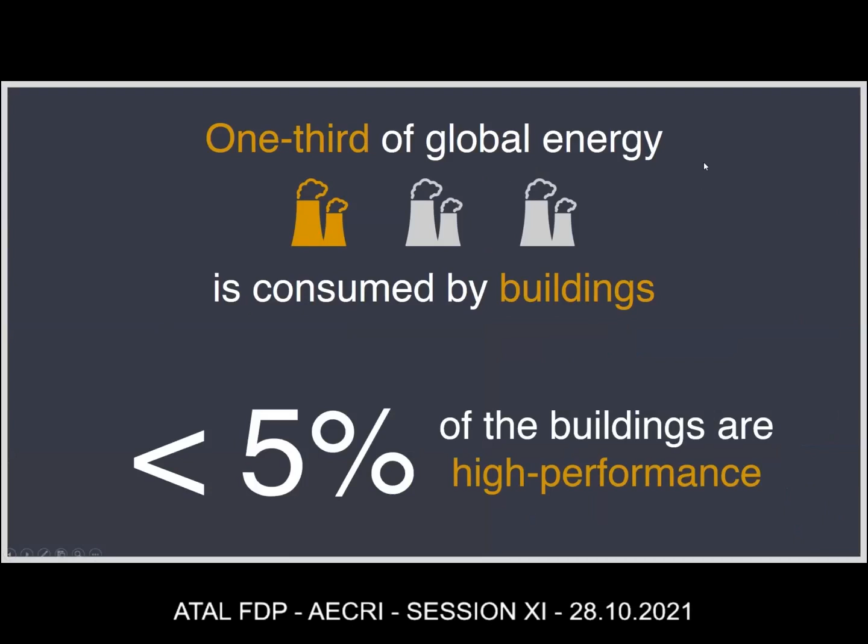If you actually see the current statistics, 1/3 of the global energy is consumed by buildings, which means 33.33% of energy is consumed by just buildings. Only after that you have the remaining 70%, or 68%, which is taken by transportation, industries, and others. So building forms a sizable chunk, out of which less than 5% of the buildings are high performance. So we see the scope for energy efficiency, we see the scope for green sustainability in this sector, which is huge.

So how do we look at it? One is, there is an existing building stock, a huge, large chunk of buildings already built, and how do we look at those? The next is, how do we look at new buildings? Based on statistics projecting the construction sector, there are a lot of buildings yet to be built. At least 60% of buildings in 2030 are yet to be built at the rate we're constructing new projects. So there are two approaches: how do we look at existing buildings, and how do we design new buildings?

For existing buildings, it's very limited. Not much you can do because a lot has already been spent and the building has been constructed. So we can only focus on operations, how we set targets, minimize energy and resource consumption, and track performance. What can be tracked can be improved, what can be measured can be improved. That's the approach to existing buildings.

But what we're going to focus on today is how we look at new building stock, because we as engineers, architects, and designers of the future have a big role to play here. This is where we bring in a collaborative approach. In every building, not just one expert is required. We have the civil engineer, architect, mechanical, electrical, plumbing, landscape, interiors specialists, contractors—so many people working together, each an expert in their own field. But what happens is they bring their expertise without looking at the interrelationships between the other experts, and that's where buildings aren't optimized to be fully sustainable.

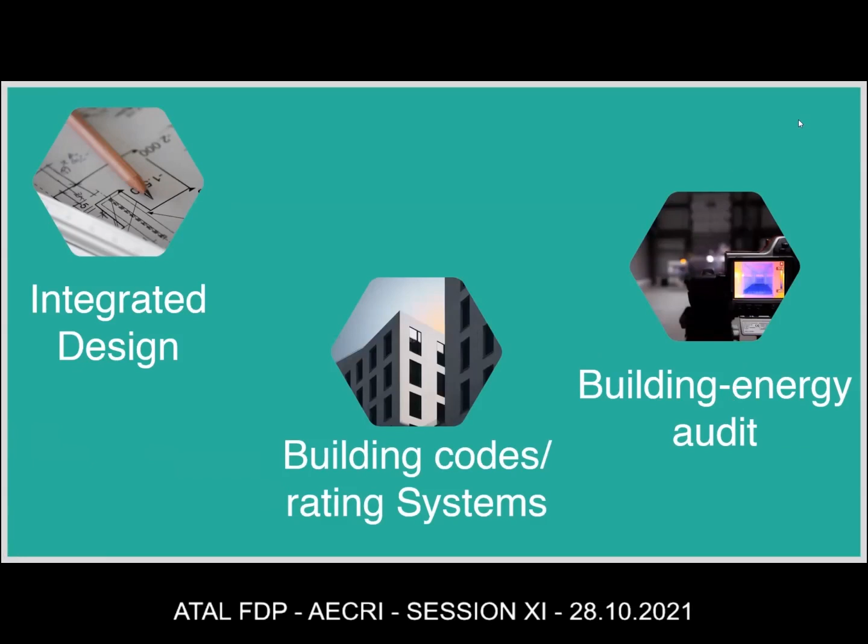This way we focus on the people impacted by the design process—the people who use the building, the visitors, etc. Also the profit, because we understand how much we're spending and how much we can save. So if you're saving 40% energy...

Excuse me, ma'am, your voice is really low. My voice is low? Has it been low the whole time, or does it keep going on and off? It's keep on going low, ma'am. Just give me a second. Okay, ma'am.

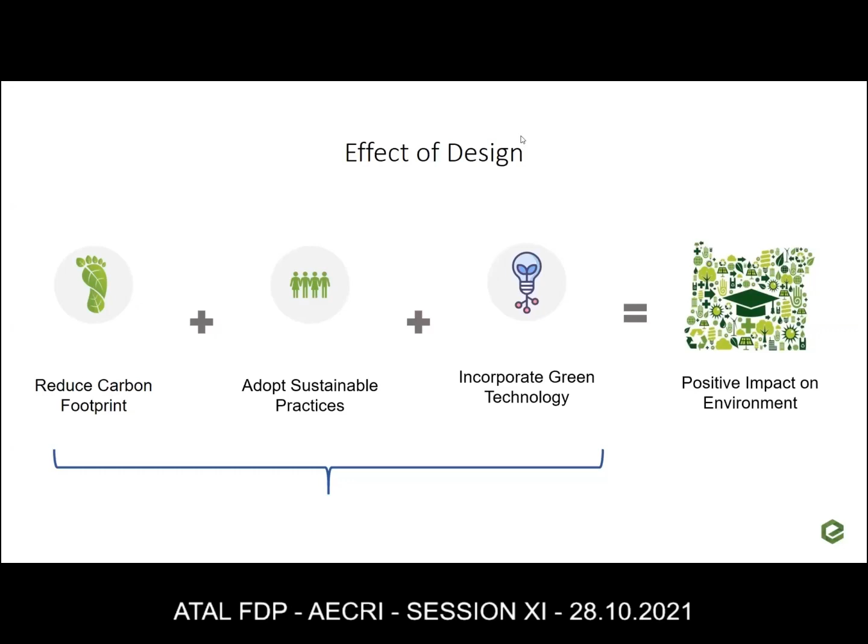Earlier, when the whole discussion on green building started, maybe in 2000, early 2000s, the focus was on providing the least negative impact on the environment. Today, we are moving on to how can buildings even create a positive impact on the environment. So there is a shift in the way we're looking at things.

So let me start with the first and foremost - why it's very important is the building codes, ratings and policies today have taken a new dimension. We have the Bureau of Energy Efficiency that has mandated the energy code across various states in the country. Tamil Nadu is also on the verge of making it mandatory. So all your buildings will comply with code.

There are green building rating systems which are also voluntary in nature, but various state governments have made that into a policy where you have extra FSI or some tax incentives. All of this have come into place. I'll discuss a bit about what is happening in the country with reference to that.

And then we'll go on to the design approach. So the first part will be on the building codes - what are the rating systems that are available in India? And I will stress upon the Energy Conservation Building Code. What is the effects of regulation and policies?

As I said, the integrated design approach is one important parameter that has been brought about thanks to policies and regulations - market transformation, and what is the opportunities that exist for professionals or students who are graduating.

So if you look at government codes and policies, the first and foremost is - when there is a power shortage, what do we do? First and foremost we will start blaming the government. We'll say how can they not give us energy supply, power supply? But do we realize that the way we are going on increasing our demand, there is only that much of coal reserves available to us to generate power? We are largely a coal-based energy economy. So how can the government go on supplying without addressing the demand side measures?

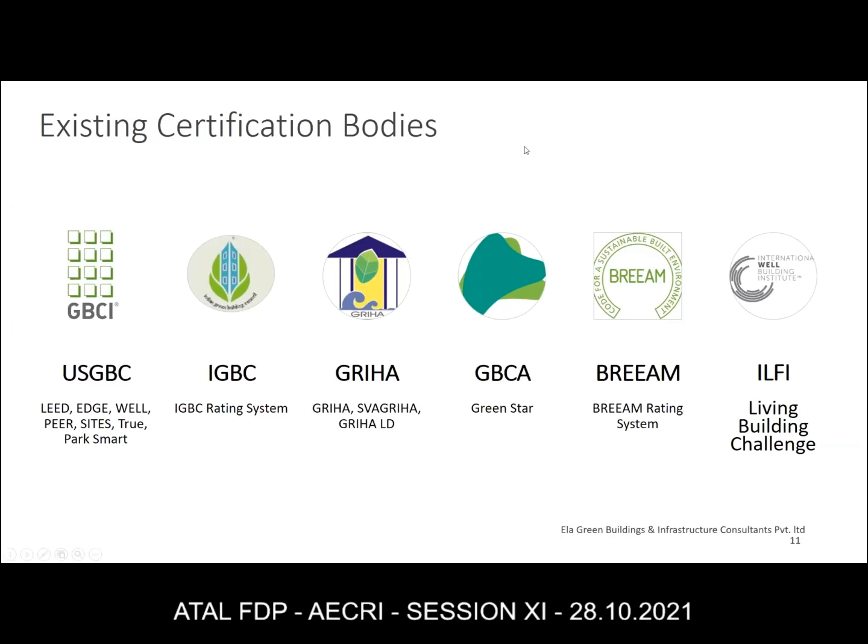Green Star and BREEAM are other rating systems applicable globally, not so much in India. There is also Living Building Challenge.

So, like I said, this is what is being focused on in India. Majority goes with these rating systems because we have offices here - if there are queries or questions, you can reach out to various people, making it easier for us to adopt.

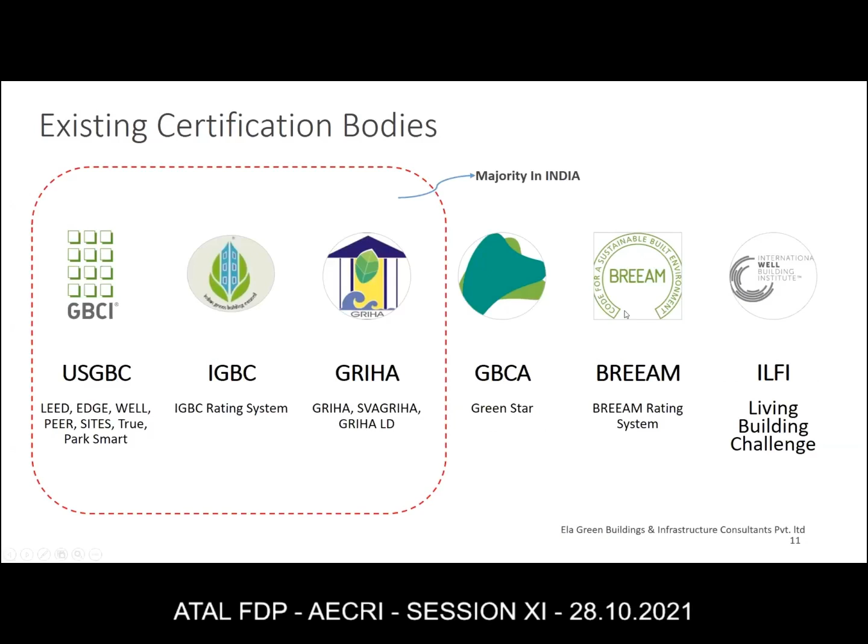I'm not going into detail on all this, but EDGE is catching up a lot in India right now. It's mandated by the International Finance Corporation and managed by GBCI and SGS - these are the two organizations that monitor EDGE in India. There's also SITES, and the WELL rating system, which focuses on the health and well-being of occupants. There's zero waste for waste management, a rating system called TRUE, and one for parking buildings.

It's important to know this, because tomorrow there are a lot of examinations that qualify you as a sustainability professional, so it's good to know what's happening in the current scenario.

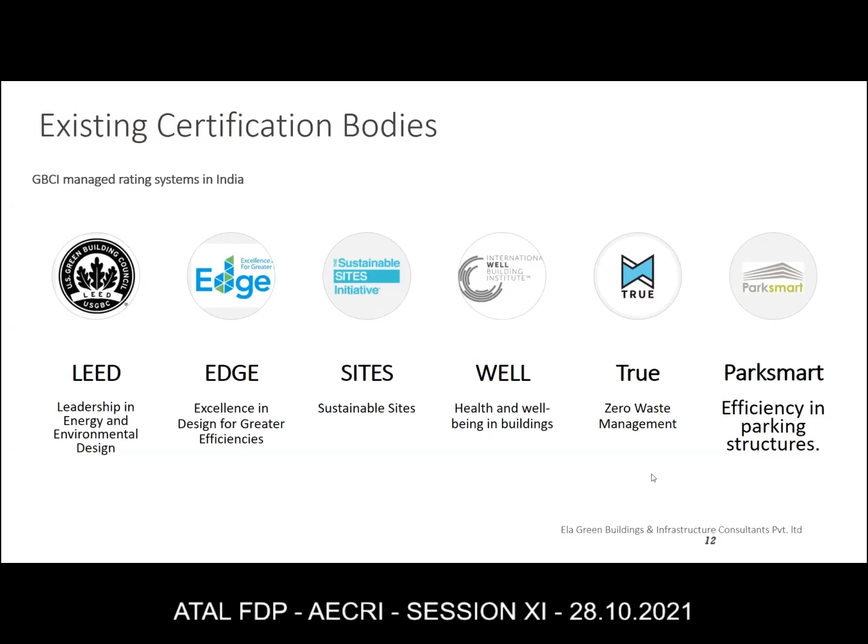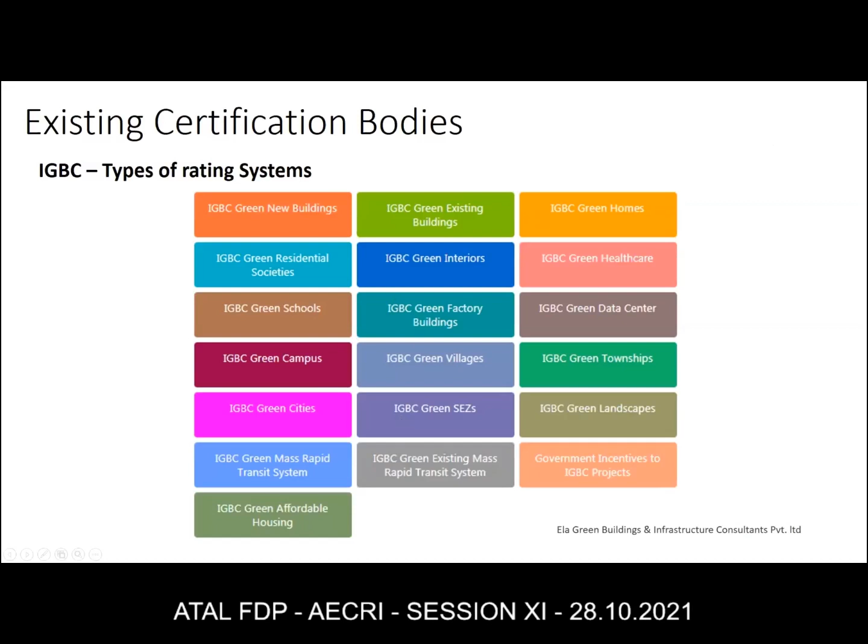As I mentioned, GRIHA has only 3 categories, unlike IGBC or GBCI. We have SVAGRIHA for smaller buildings, GRIHA itself, which stands for Green Rating for Integrated Habitat Assessment, and GRIHA LD for larger buildings greater than 1,50,000 square meters - basically 15 lakh square feet and greater gets the larger rating.

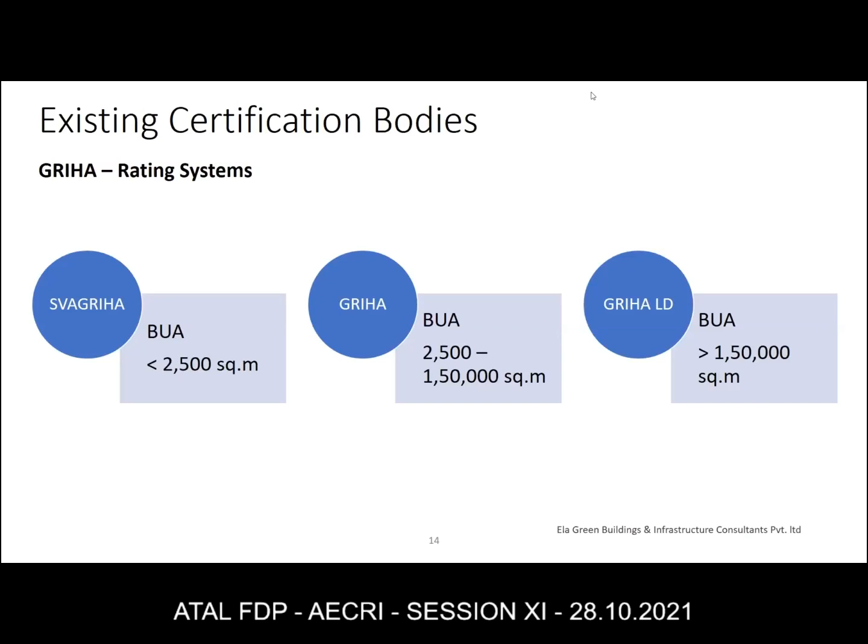Like I mentioned earlier, the green building rating systems are holistic in nature. We talk about energy, water, site, materials, resources, indoor environmental quality - there are a lot of parameters that a green building rating system covers.

On the contrary, there is this code called the Energy Conservation Building Code, mandated by the government of India, whereas other rating systems are run by private organizations or NGOs and are not government backed. The ECBC is backed by the government, by the Bureau of Energy Efficiency, and since buildings are a state subject, it becomes the responsibility of every state to mandate it. Right now about 16 states have mandated it - Tamil Nadu will have to mandate it soon. Everybody has to do it at some point.

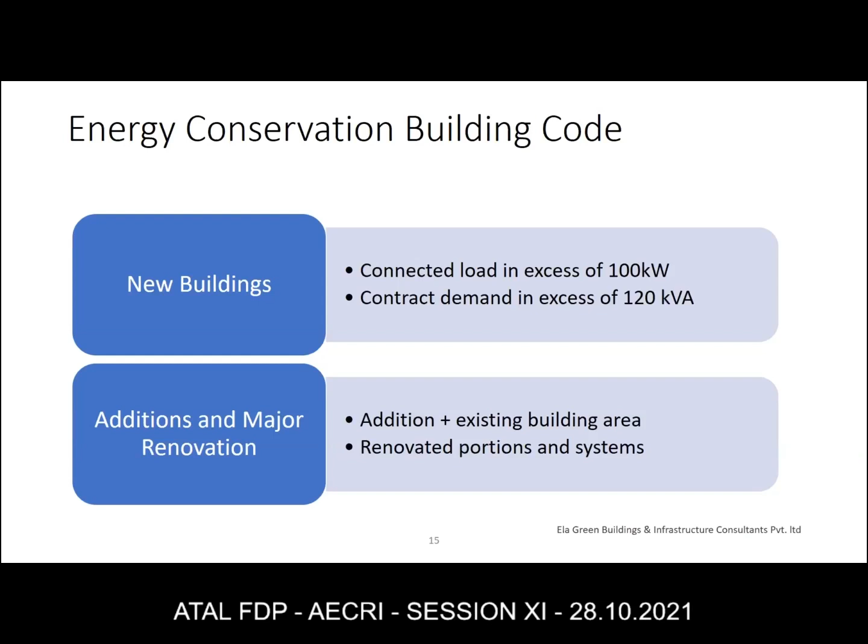The criteria here is that any building with a connected load of 100 kilowatts or more, or a contract demand of 120 kVA or more - if either criterion is met, then any commercial building falls under the ECBC and has to comply with the code. ECBC, the Energy Conservation Building Code, focuses only on energy. Unlike green rating systems, where you focus on site, water, rainwater, materials, and all of that, ECBC is focused primarily on energy, and it only provides a guide or benchmark for minimum performance.

Green building recognizes excellent performance, where you go over and beyond the benchmark, whereas ECBC just sets the basic benchmark.

So if you look at the salient features of ECBC: one, it defines minimum efficiency standards. This can be in terms of the thermal properties of your wall or roof, or it can be your air conditioning systems, lighting, or renewable systems. So it looks at the energy components of every aspect of the building design.

Now this is where we need to understand that it is not one person's expertise. Normally when they say building design, the architect will say MEP is not my scope. Unless everybody understands the basics of every part of the building, it is impossible to achieve the best outcome. So when I'm training students, I tell them it's important that even architects have to understand heat load calculation and the basic principles of heat gain into a building. Only then will we be able to guide the team for a holistic approach.

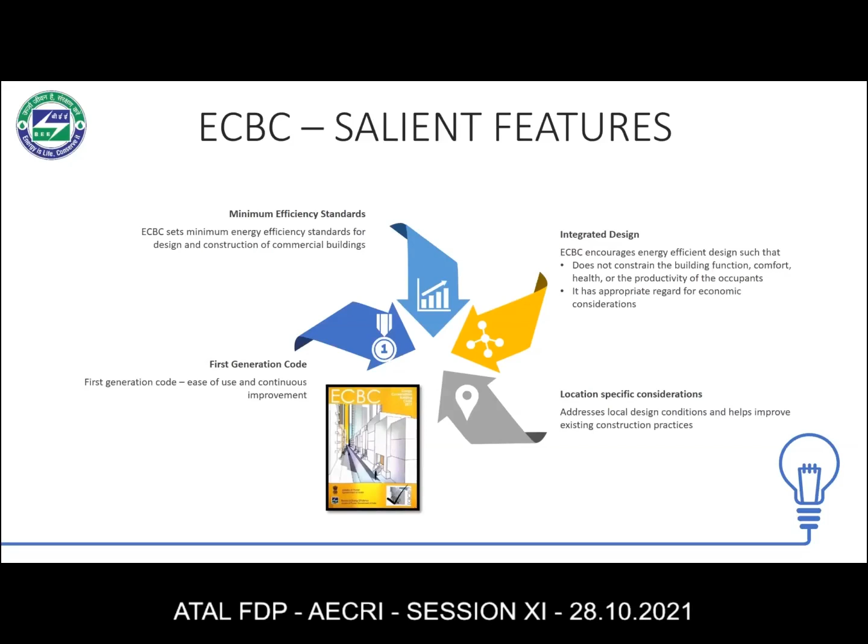You can look into it more on the website, there are more details. And yes, it's a first generation code, so it will be subject to continuous updates, and it's important for us to be up to date with current trends.

So what are the buildings that have to comply under ECBC? All kinds of buildings which are not residential and not industrial. Please note, residential buildings have a different code. Industrial buildings have a lot of process loads, so building loads become a smaller component, and a different set of rules will apply.

So those two are exempt, but any other building, hospitals - there was a question when we started talking about this. Projects came back and said, this is a government hospital, it does not come under commercial building. No, any hospital will come under this, along with star hotels, service apartments, shopping complexes, public assembly spaces. Some projects like temples said we are not eligible. No, even if it's a temple, if it's air conditioned and comes under 100 kilowatt connected load, it has to comply.

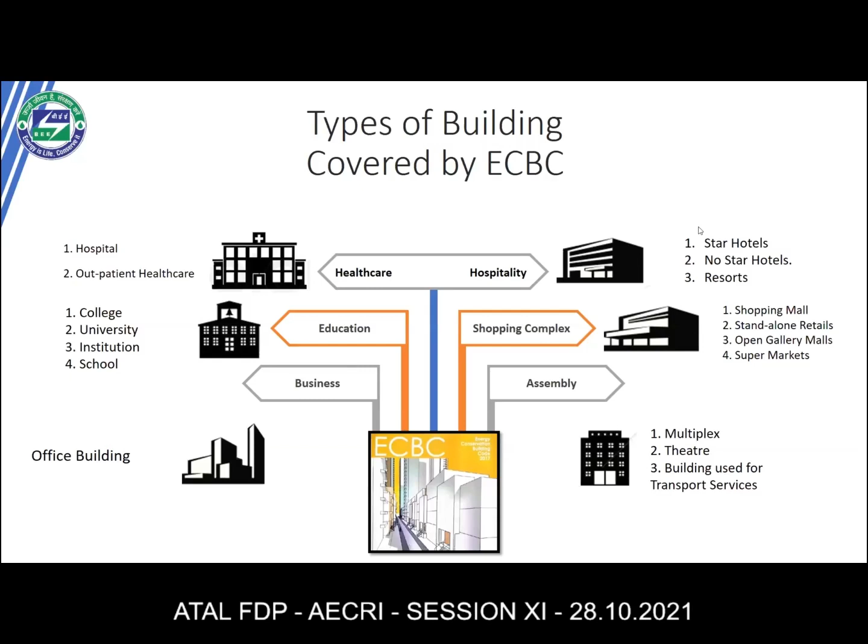So any public assembly space, it can be a theater, a multiplex, office buildings, colleges, universities - all of them will come under this.

So quick understanding for our purpose: what is the difference between the Energy Conservation Building Code and a green building rating? Like I said, ECBC is mandatory, it is backed by the government, it is a regulation, and it is only limited to energy efficiency. Whereas green building ratings are voluntary in nature, they cover all other aspects of green, and strive for excellence. It's not a benchmark for basic performance, it looks for beyond better performance, and it is not backed by the government.

In an integrated design approach, all the experts sit together, so you have a holistic approach and understand the building in its totality. You will know if I have 60% glass on my facade, this is my air conditioning system, this is my lighting system, because I'll have adequate daylight so artificial lights reduce. You understand the building from the site perspective and the internal components perspective, so a lot of the holistic approach is followed. You have a collaborative approach because you're working with all the experts.

When we have done projects, we even sat with the contractors and explained to them. Then there is a design charrette, which is when, based on scientific analysis and various design inputs of the experts, we actually see things like if somebody says add roof insulation, are we saving 3% or 6% in energy? So if the savings are negligible, we don't have to spend extra on roof insulation. These kinds of analysis help us do this if we sit together.

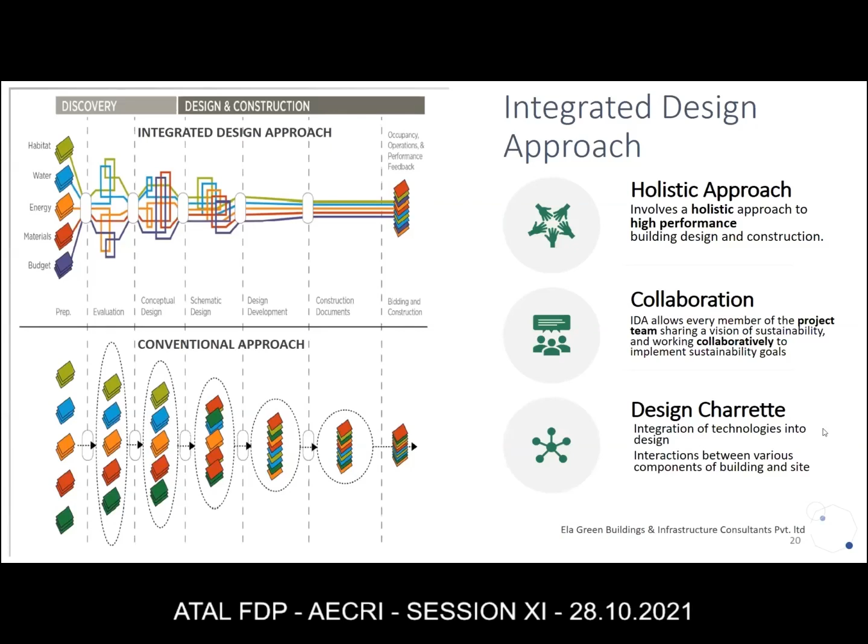Market transformation I can tell you for sure, because this has been a relatively new industry starting from the early 2000s, which I have been a part of. Buildings have evolved from basically substandard performance to having typical green building practices to becoming innovators. Today we have buildings that are net zero, with so much passive design combined with innovation. Insulation is being used predominantly across buildings, especially in hot and humid climates. So the market transformation in the last 15, 20 years has been tremendous.

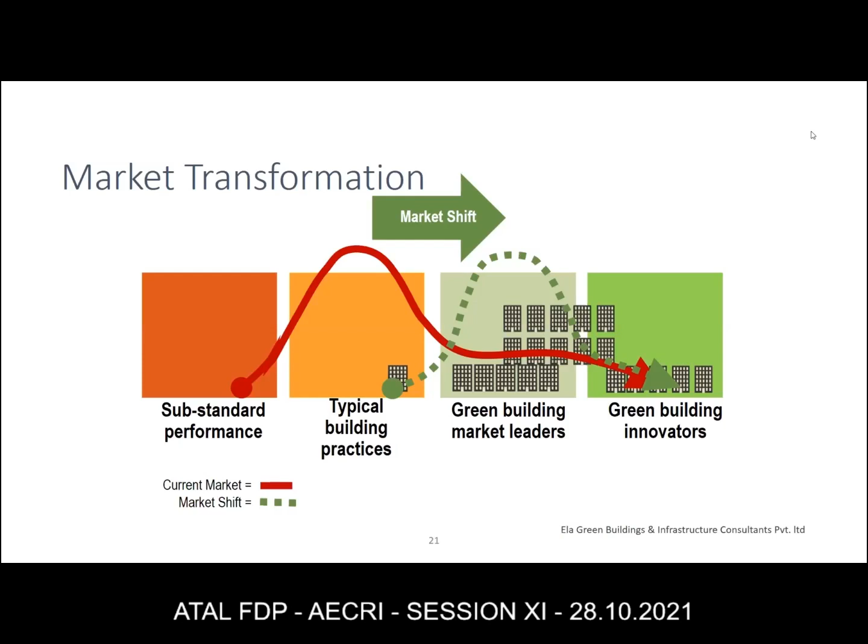The availability of building products is critical. Earlier, when I was doing green buildings for various projects, I used to go and ask manufacturers of paints if they had low VOC paints, and they wouldn't even know what it meant when you spoke to vendors and suppliers. Today you have Shah Rukh Khan in ads saying we have low VOC paints. That's the market shift that has happened. People have caught on, people understand what is environmentally sustainable, so the availability of insulation, low flow fixtures, plumbing fixtures, waterless urinals is easy now. Before, all of this had to be imported.

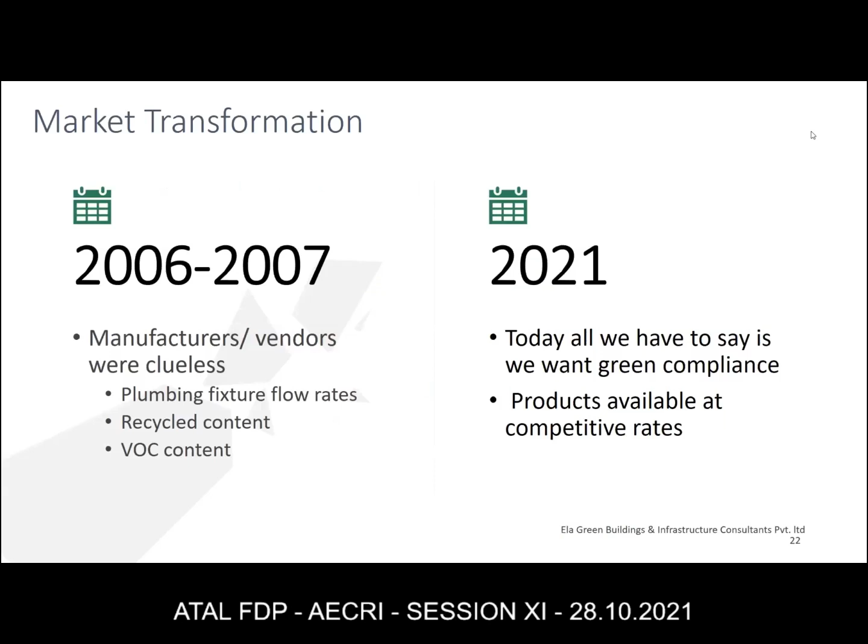This is an example: earlier, manufacturers and vendors, if you asked them about recycled content, would say there is no recycled content in our product, not realizing it was actually good to have an element of recycled content. All that has shifted today, making it much easier for us.

There are new professions now - we have ECBC consultants, energy simulation experts. Before, in 2000, there were probably a handful of people who could do energy simulation and use the software appropriately. Today we do trainings, and we have engineers and graduate students doing all of this. There are third-party assessors - for example, in Telangana, ECBC is implemented, and there's a list of identified third-party assessors who the government reaches out to for code compliance. So there are a lot of new professions that have come up, along with government incentives today.

Looking at the various states that have already mandated measures, Kerala has recently announced additional FAR. West Bengal already has additional FAR for IGBC and green certified projects. For GRIHA, Maharashtra has announced something, and even Himachal Pradesh and Punjab have policies. So all these states have had some policies which encourage the adoption of green building practices.

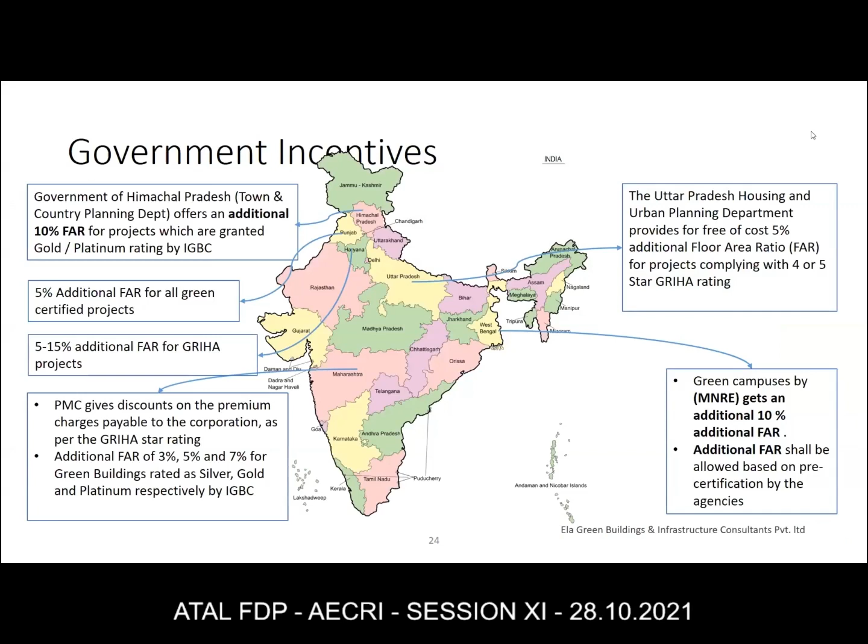So I'm going to move into our case studies part where we understand how buildings are designed, what is the need for green buildings, and how the design per se has an impact.

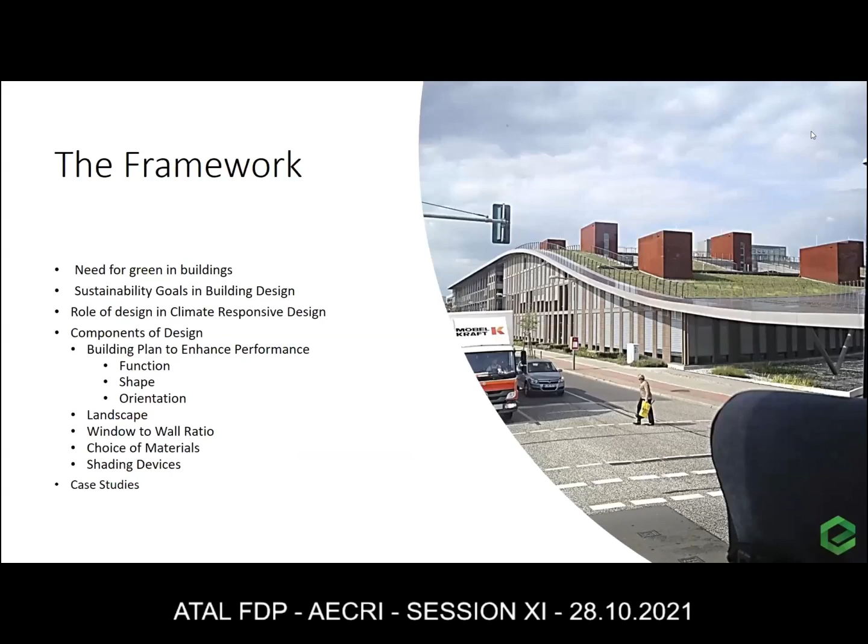So I did talk about the integrated design approach. What are we looking at by achieving a collaborative design approach? One is integration of technologies. Today we have so many technologies available with us, even in mechanical, electrical, civil construction. So how do we integrate all of them? Suppose we are using precast, will that restrict us in terms of insulation? So unless we sit together with experts, we will not know.

Where specialists work together, we also need to understand how the climate, the microclimate, the environmental factors of the site impact the building. I mean, how many of us actually start with the climate study and move on to the design process? Most of the time, when we start doing a project, it's all rule of thumb, it's all what we know earlier. But there is an element of study, analysis, research.

And we also look at the building components, like I said, chiller, glass, lighting, interiors. You have lighter interiors, there's more reflection of interior lighting. Landscape has an impact on your energy around the building, on heat island effect. I'll talk about this in our case studies. And most importantly, we're looking to achieve innovation.

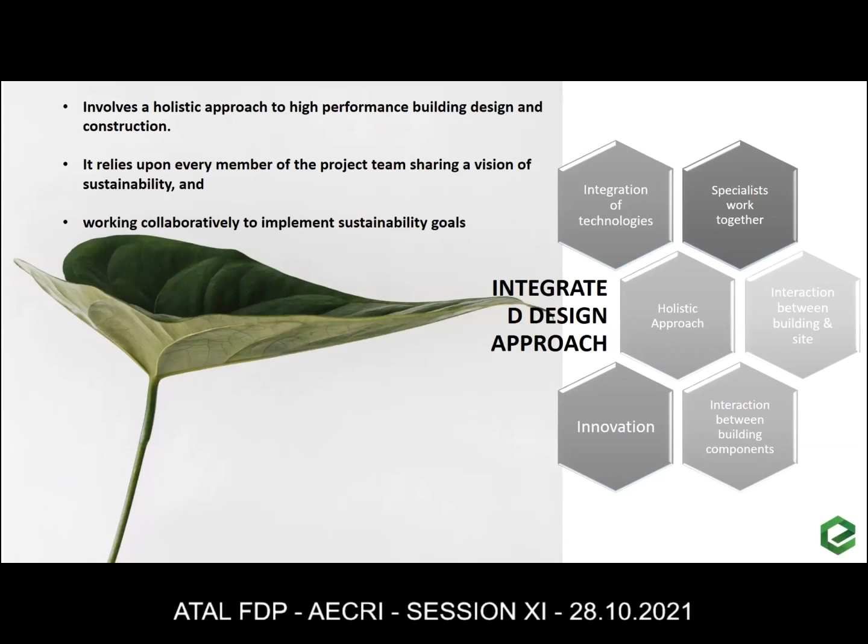So if you look at the site level, we start with the climate analysis. We look at the orientation, how the sun path analysis happens, so what is the facade that has to have glass, the facade that minimizes glass. We look at wind direction, especially if the building is mixed mode, or where there are corridor spaces or naturally ventilated spaces. It's important to capture the draft, the topography of the land.

Then we look into views, the connectivity of the building to the external environment. Today we understand that is very important, right? I don't know how many of you have heard of this terminology called ICU psychosis. People in the ICU, apart from the physical illness, also have a problem because they are mentally not able to connect to the outside. They do not know whether it's day or night. So that's a terminology. It's important when people sit in an office building to be able to connect to the outside, understand the landscape. So all this becomes a part of the site.

Then we move on to the building per se, where we look at the energy simulation, shading, and microclimatic factors. Microclimate is the smaller climatic factors that are around the site—one is the larger climate for the location. The next is, suppose you're situated near a park or near a water body, are there elements you can utilize in your design?

Then we look at building materials. What is the kind of insulation, thermal properties, passive design, the air conditioning, lighting, ventilation—all these parameters become the building design component. These are constantly interacting with each other.

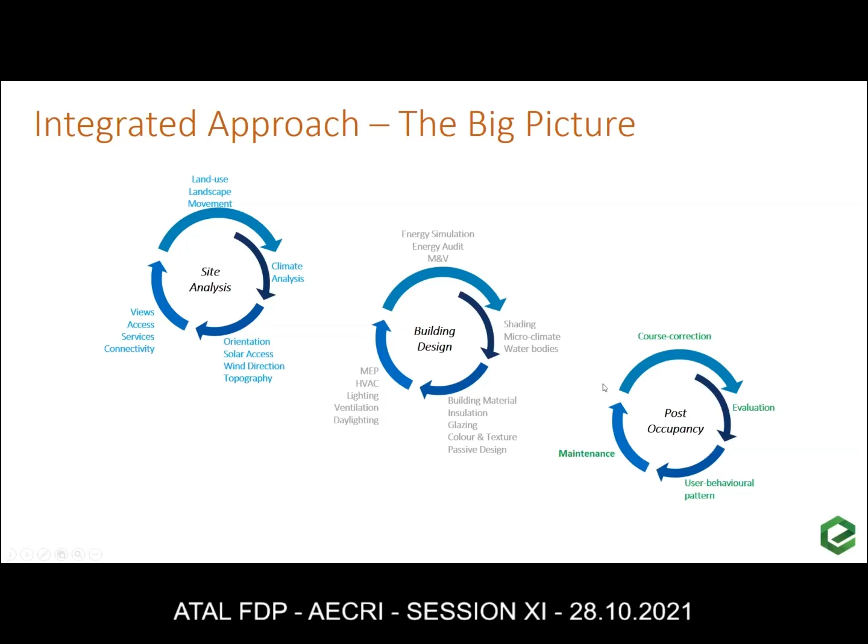And the last element is looking at post-occupancy. Once your building is operational, is it functioning in the designed fashion? Is it working towards that? So there is a behavioral pattern you need to understand—what is the maintenance, what is the performance monitoring, and then of course a course correction if required.

So today a lot is being spoken about net zero. Net zero is nothing but moving towards a completely self-sufficient energy supply system where you don't depend on the grid, where we're looking at solar or any form of renewable source. But again, net zero does not mean you just design a building and then complement it with solar power. That is not net zero. There is an approach towards it.

That's why we designers use the term towards net zero, because net zero is the final outcome, but towards net zero is what we call the trias energetica approach—a three-pronged strategy. First we look at the design per se. How is your architectural design? Are there any passive measures? The primary goal of the architect is to design a space that is closest to thermal comfort condition, right? So suppose my outdoor temperature is 40 degrees in peak summer, and my building by design is say 35 degrees, then your air conditioning systems will have to cool temperature from 35 to 25 and not from 40 to 25. So basically, it depends on how your design is done.

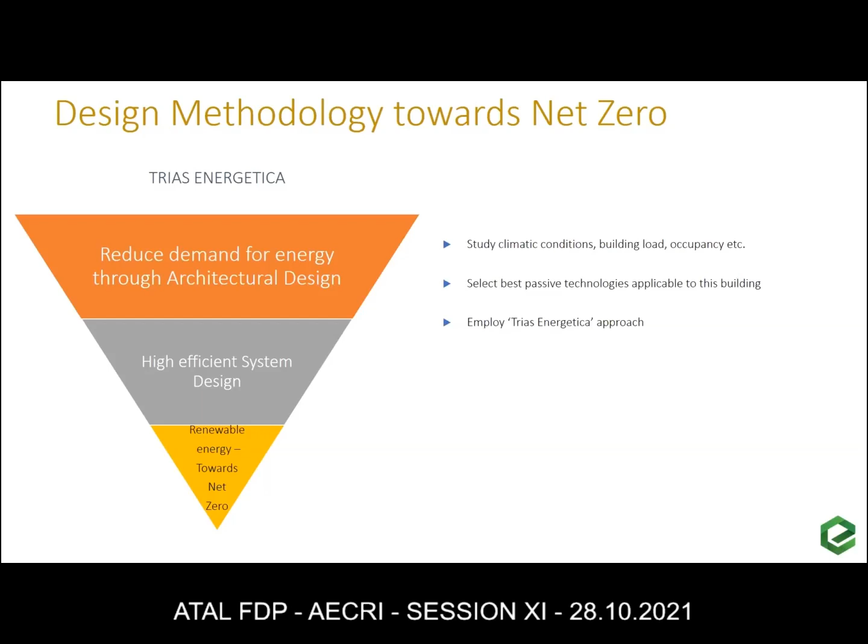Next, you further bridge it with air conditioning high-efficiency systems. So say you're able to achieve 35 degrees, but that's still not comfortable—so you use mechanical systems, and you make sure they are highly efficient mechanical systems. And then finally, we're looking to bridge it with renewable energy. So this is the three-pronged approach we look at towards net zero. I'm just talking basically about concepts so that we understand green in its holistic perspective.

Now, the first step that we do towards design, whether you're HVAC, MEP, architect, anybody, we need to define the goals for the project team. We need to understand what is our primary goal towards sustainability. While you say, I want my building to look futuristic, or I want it housing 100 people, there are lots of goals that you have. But also in terms of sustainability, what is it that we are looking at? So once we finalize those, whether it's minimal first cost, or you're looking at complete supply of off-grid power, or making it an interactive building where it becomes a textbook, an educational building, all this we sit and fine tune at the design stage, and then we understand how we can go about it.

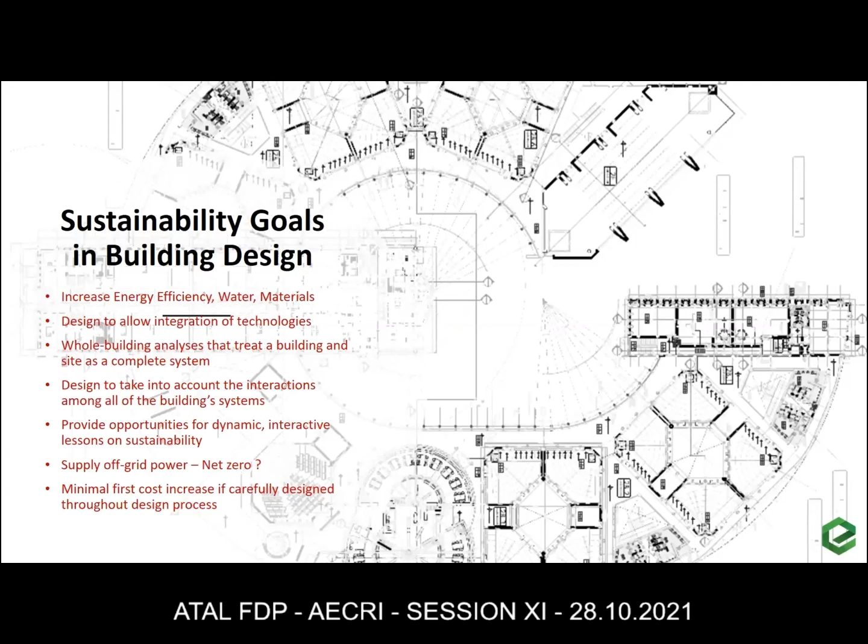So always I tell, wherever I go, the starting point becomes climate. Climate dictates every aspect of our life, and for years it has always dictated building design or architecture. It's not like we are not looking at it right now, but in the need for technology and quick construction practices, we have a lot of constraints in terms of space. Like earlier, the Golconda Fort has walls which are 12, 15 feet thick. Today, we do not have the luxury of using that kind of material or that kind of space. Carpet area is so important in today's modern technology. That is what is critical, and that is where the green building rating systems, or your code, come into play.

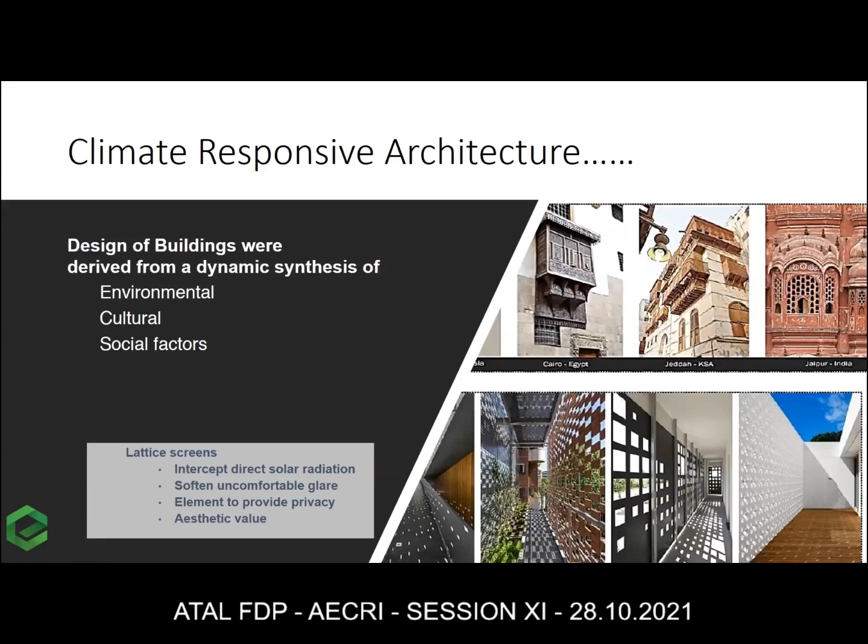So if you look at our ancient buildings, which is where we derive our inspiration for today's buildings as well, it has always been environmental, cultural, and social factors. Environmental factors have always played a role in the design of buildings, and now we can do it with a more scientific approach. This also bridges the gap between architects and engineers. Most often than not, when we come up with a design, as an architect, I mean, I've been on both sides of the spectrum. Being a green building consultant, I have to know the engineering part, and I also work with architects. So what happens is the architect talks about various parameters where the engineer is unable to comprehend because you're not backing it with numbers. The design looks more like a subjective matter.

So when we start a building, the primary goal is how do we design the structure which is closest to thermal comfort. How can we do that? There are various ways in which we can do it. The first step would be to look at the building. The next step would be to look at its systems, the mechanical systems, air conditioning, lighting, all electrical, and then finally renewable. So the first step would be, how can we bring in modulations to bring the building closest to thermal comfort?

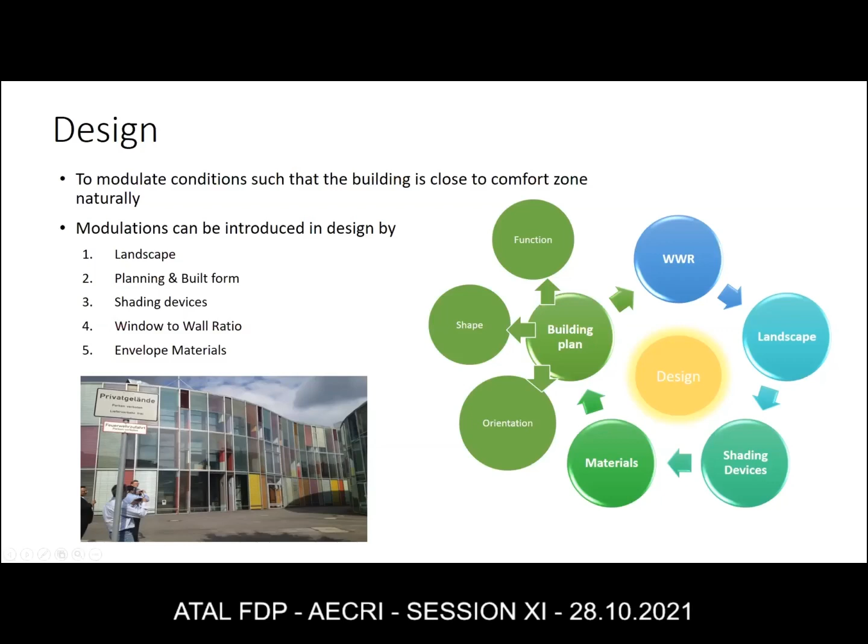Otherwise it's difficult. Looking at the first component, landscape - carefully positioned trees. Again, this is from the US Department of Energy. They say carefully positioned trees, if it's a ground plus one structure, can reduce up to 25% of the energy consumption in a household.

And if you actually measure temperature in the same location under a tree versus over the black tar top road, you will find a good 14 degrees Celsius difference. So, we've done an experiment to see what is actually possible. These are some of the buildings that integrate landscape into the building facades, and how we can do it.

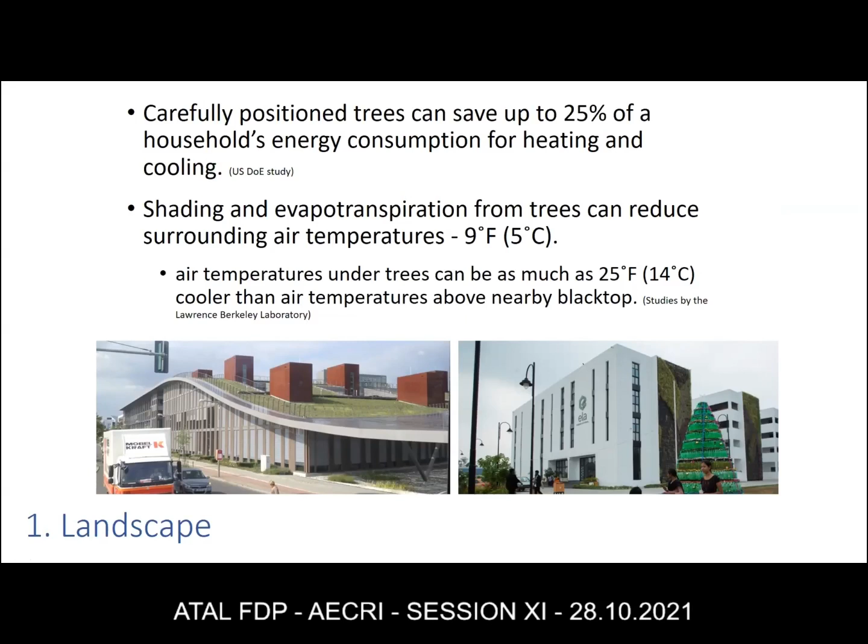And most importantly, landscape reduces or mitigates what is known as the heat island effect. I don't know how many of you know what the heat island effect is. If you've gone to temples, you'll know they would have painted a white paint - on that white paint you will be able to walk, whereas on the black tar road you will not be able to walk. Why? Because a lot of heat is being absorbed by the black surfaces or the built-up surfaces.

And what happens - when the temperatures drop, the surfaces that have absorbed all the heat will slowly emanate the heat back into the atmosphere. So the net result is there will always be a constant increased temperature around your building. That's why if you go into a park you will feel the temperature drop, whereas if you go into an open parking lot or a concrete jungle, you'll feel temperatures rise. So to avoid this, a lot of greenery, landscape, reflective surfaces - all this needs to be planned at the design stage.

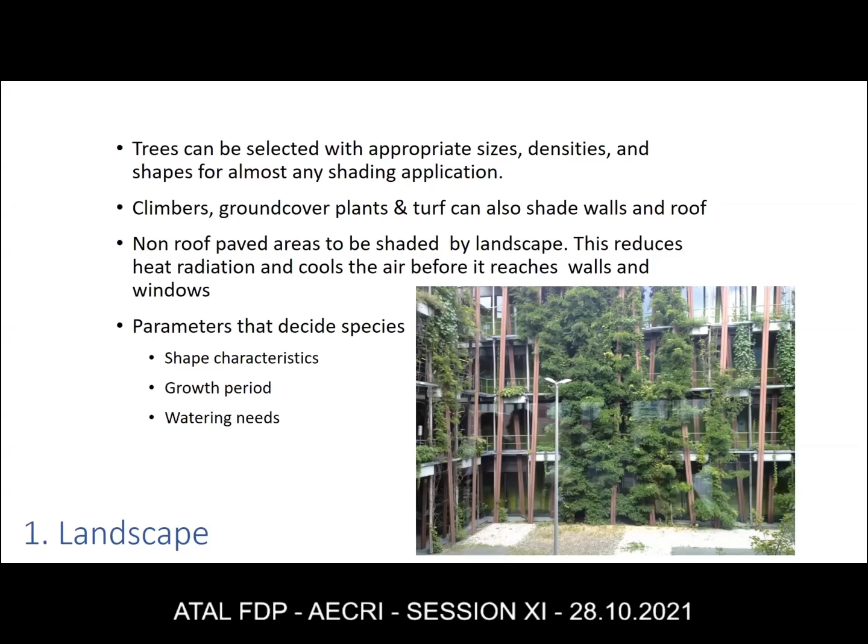Now, the second thing I spoke about is building planning and built form. Most importantly, we have to look at a plan which places functions in locations that minimize the need for applied energy. What does this mean? Suppose I have an auditorium, suppose it's an education institution, and I have an auditorium.

An auditorium is a space where I don't need daylight - I'm going to use artificial lights because it's a performing space. Now that space, if I put it in the periphery of the building, then I have not done justice to my design, right? I'd rather have classrooms on the periphery where a lot of daylight and views are required, whereas I can put the auditorium in a...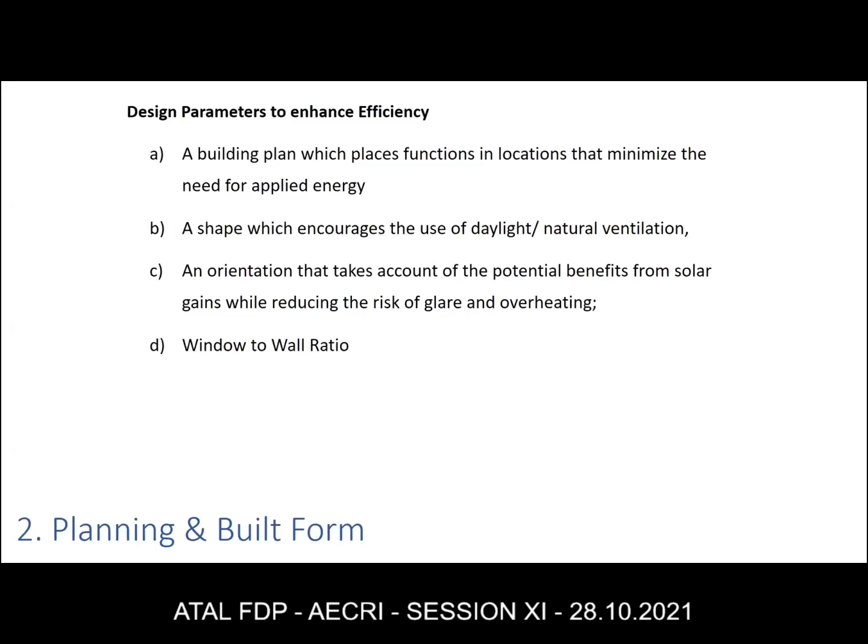How you functionally place spaces within a building is critical, and how does a shape encourage use of daylight and orientation. East and west facades have maximum exposure to sunlight, so we would want to minimize the east and west facades if possible, if we had the option to play with the site, and minimize the glass in those facades, keeping in mind window to wall ratio.

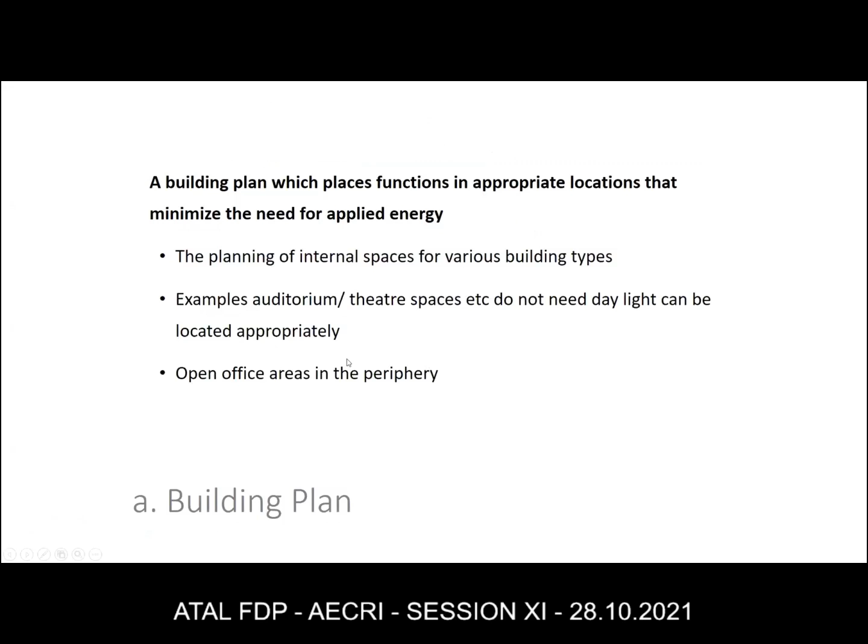So you see how every space is open. This is again a naturally ventilated building, and air conditioned spaces are put in the 2 blocks - the computer labs, the administrative block - all of that go air conditioning and allow for cross ventilation.

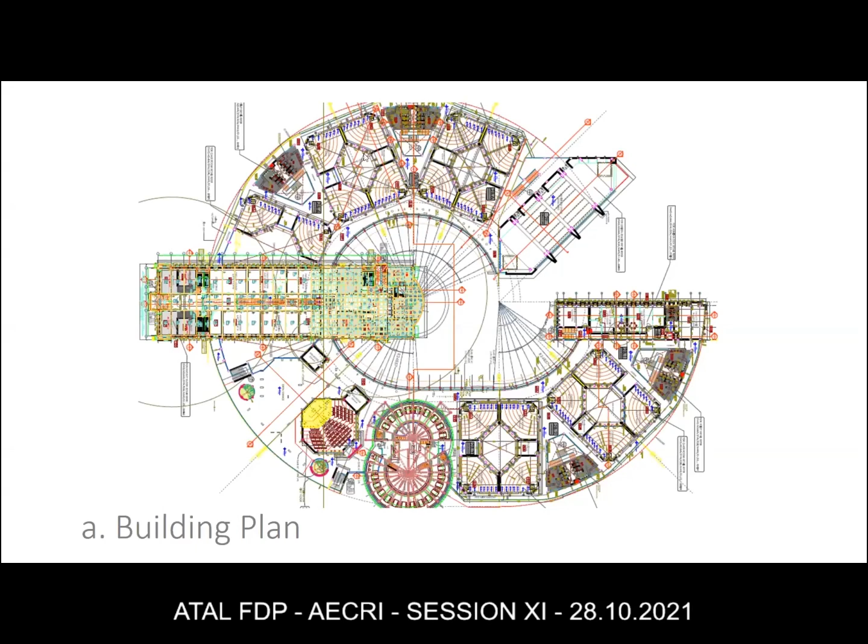This is the Coal India Corporate Office building. The architect for this was Rajawal Associates. If you see the depth, the deep portion on this side is the open office area. Look at the depth of the floor plate - how well it has been designed to ensure there is daylight penetration from both sides. You have courtyards in the center, the 2 courtyards, and the floor plate is at a certain depth to allow for daylight penetration.

Also, the architect would have provided steps - the building itself is in a stepped fashion. Why is that? Because for the central court, if he did not do that, if it was a complete cylinder, the daylighting from the central courtyard would have been blocked completely for the lower floors. There is an angle of incidence and the lower floors would have blocked the daylight. So to open up the courtyards and bring in as much daylight as possible, he gave it the stepped fashion so that the courtyards are also a little more open.

And if you look at how they've planned this, I'll come into more detail of how we did the window to wall ratio - all of that will come in later slides. But shape and form is important, as I said.

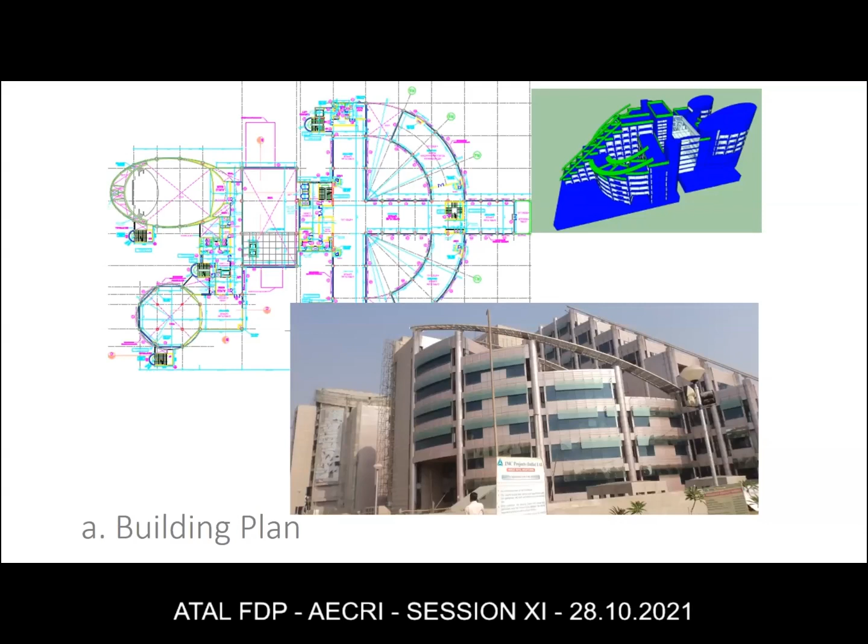Normally what people do in design is have a large floor space, with peripheral areas where glass is given and cubicles placed, while the central space is the open office. So what happens is majority of the people sitting in the building will not have access to views and daylight, because the open office is in the center, whereas the cubicles block off all the daylight at the periphery.

Just so you all understand how much daylight can be penetrated from within a specific window - in plan, X is the width of the window panel. In section, the height of the window from the ground level is Y. If you see in plan what floor area that window will provide as daylight, you take 1 meter on either side of the window and do 2 into Y. That is the depth, the amount of floor area that will have daylight. So you will know by design - this is just a rule of thumb.

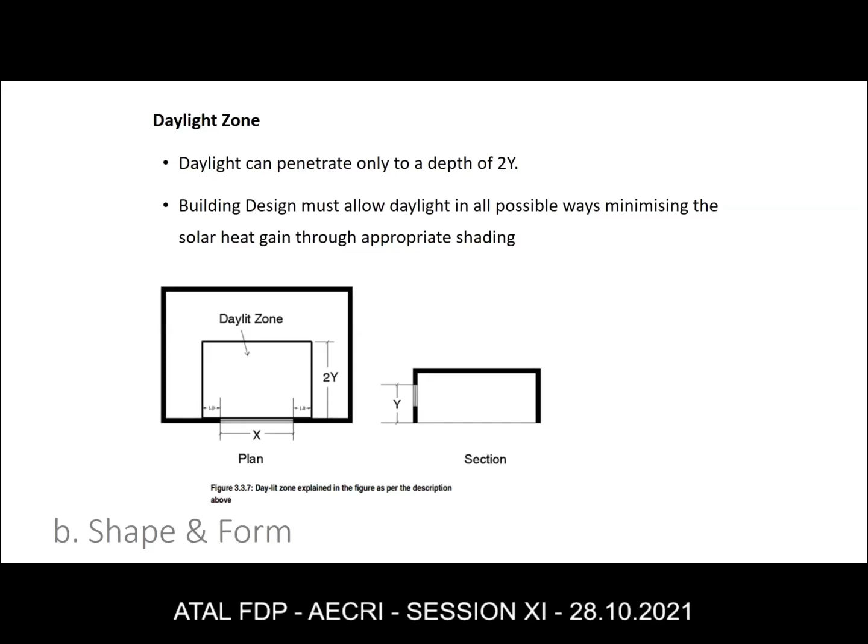There are a lot of softwares that can actually analyze and tell you exactly, but if you're quickly doing a sketch or analysis to understand how many windows to provide or what the daylight will be, you can do this. So I'm showing you there was a lot of scientific thought behind the Symbiosis building - the form, how it was arrived at, the classroom positioning, shape - all of this, how it was arrived at.

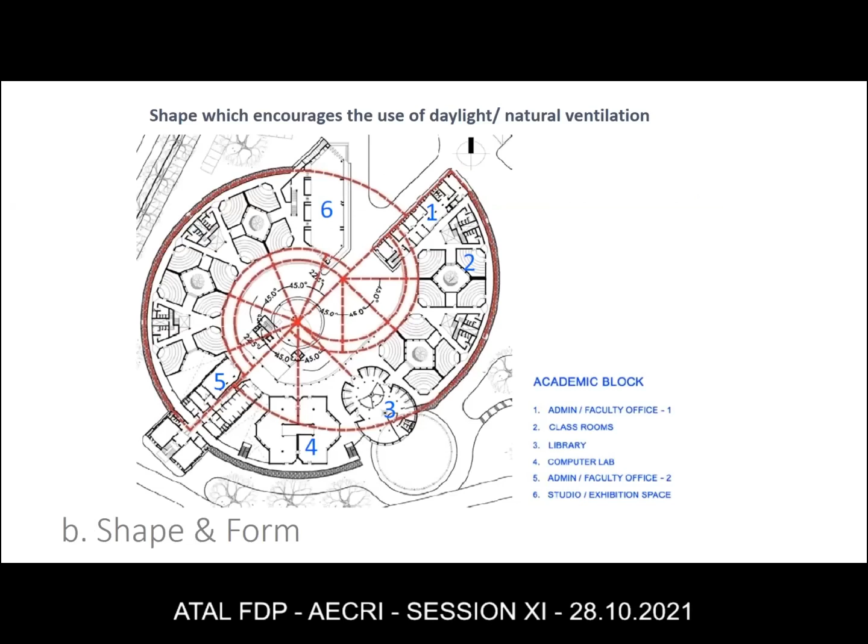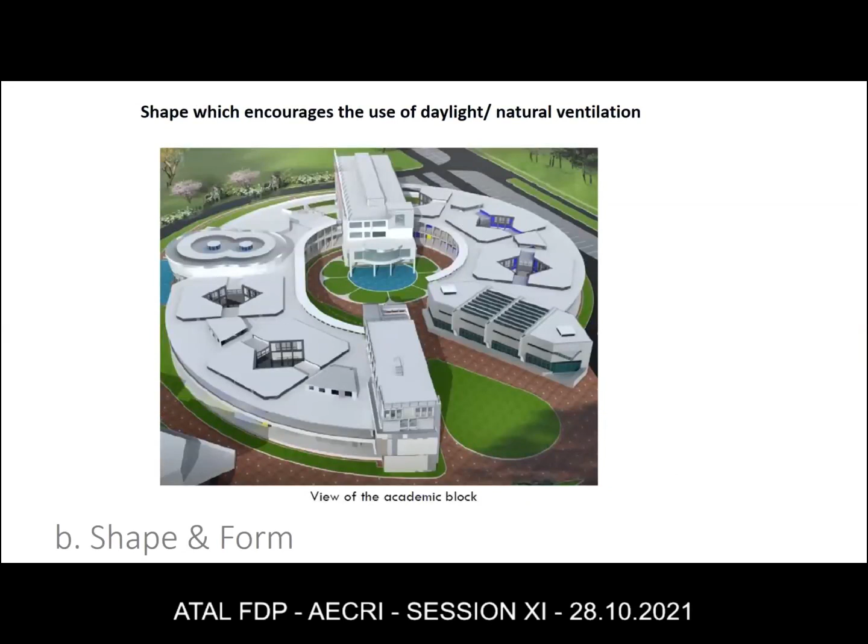This is just to show you a 3D view. You'd see the classrooms having a central courtyard, the classroom blocks. There'll be daylight windows allowing into workshop spaces, solar panels installed in one of the blocks. So if you see a cross section, how the water body actually acts as a form of passive measure, where the warm wind from the west will cool over the water body and enter the classrooms.

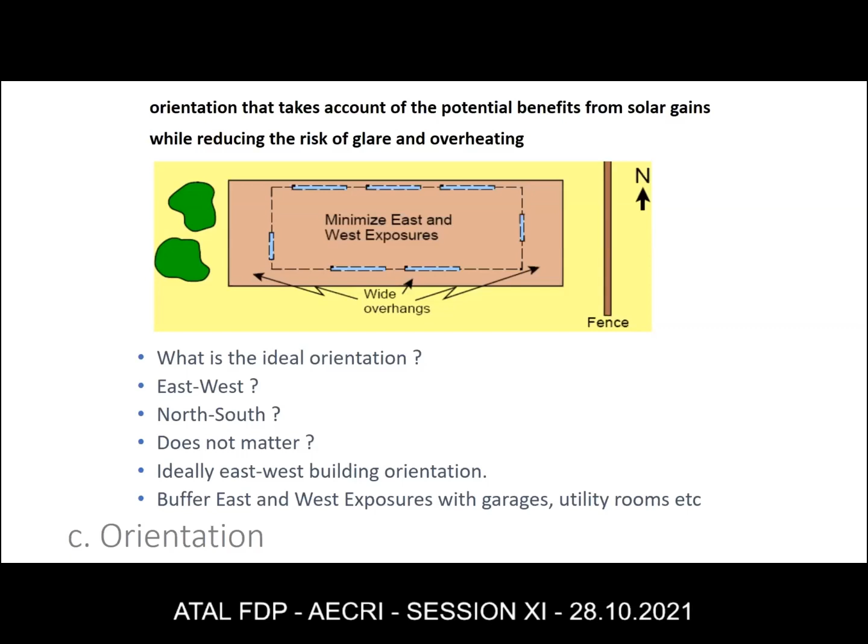I did mention about orientation, so we're looking at minimizing. We all know sun rises in the east and sets in the west. Today we have softwares that can actually look at what degree. There's a true north, but there's also a certain tilt based on the sun path analysis for that particular location. So to that detailing, you will be able to understand once you run your building through an analysis.

For example, the Symbiosis building, how we actually oriented the solar panel facade to make sure that even if they don't do solar panels immediately, but at some point later on if they add, it will be the most effective orientation.

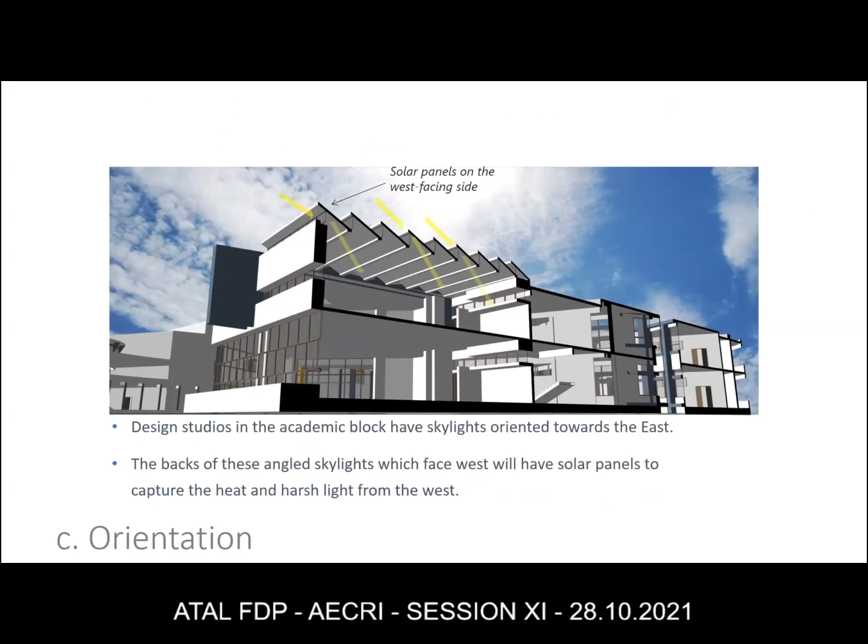Again, this is a CPCL canteen block from Manali CPCL, the Chennai Petroleum site. If you see, the entire building is oriented towards the north. There is a glass facade because they wanted the dining hall to have adequate lighting and views. So some amount of shading elements have also been planned.

So if you look, our energy model will look like this. The building that you see below, this is how our energy model will appear, to understand what is the savings, what is the consumption, what is the quantum of daylight, all these parameters.

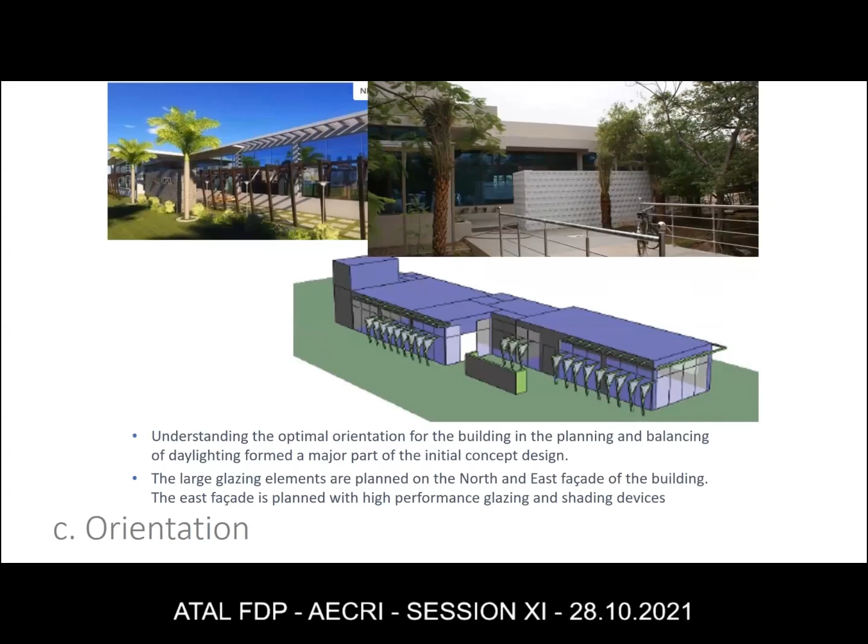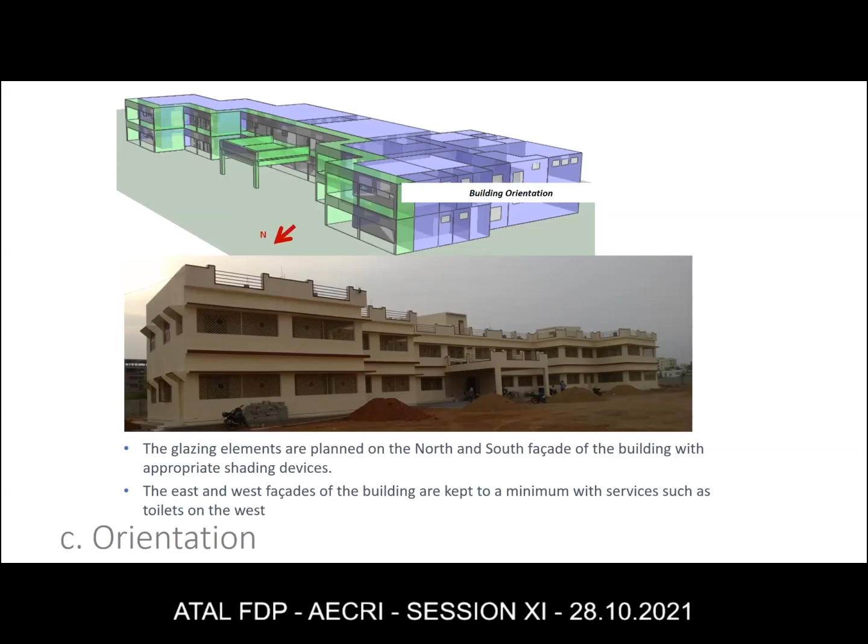This is an orphanage building, again oriented completely on the north side, to understand how we can bring down the temperature inside. This is a non-air conditioned building, and this is the first LEED certified, silver certified orphanage building in the country. We were able to achieve a 6-degree differential between the outside and inside. We use fly ash blocks as materials. Most importantly, the orientation and shading devices played an important role in this building.

Those who have visited Chennai will know this too. I just do it for showing case studies. Neither of them are my projects.

As you drive down from Chennai city to the airport, you will see these two buildings on the left side. Both are of similar size, but for a place like Chennai, which has so much heat coming in, there's a lot of humidity and high temperatures. We go even up to 42, 44 degrees in summer. Having this amount of glass is actually going to bring in a lot more energy consumption, because your chillers will be oversized. You have to cool the entire space so much more, because heat gain is happening on all 4 sides. So just to see a stark contrast between the 2 buildings, a building can be planned with glass, but how do we minimize the window to wall ratio is critical.

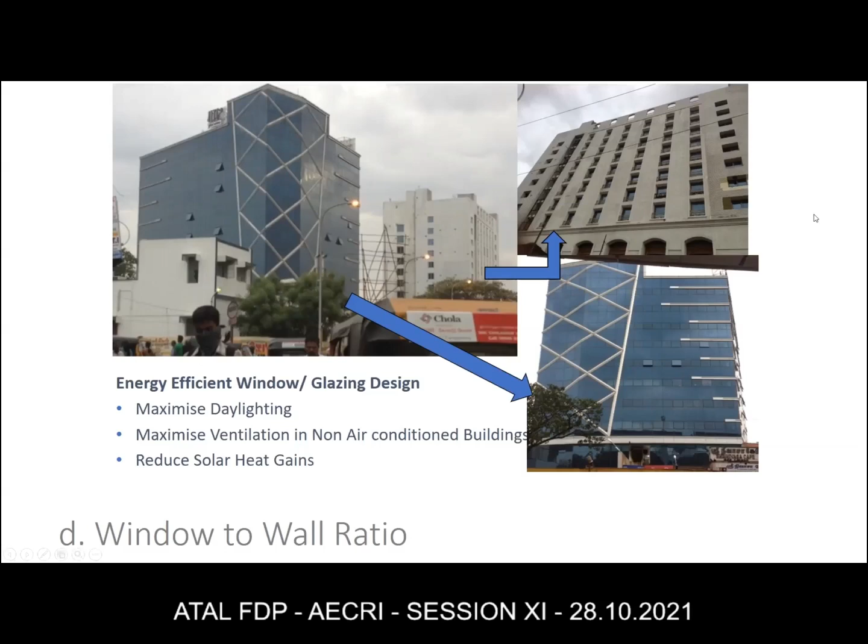So this is one of our projects from Hyderabad. If you see here, the window to wall ratio, the first option given by the architect had only 29% glass. In this case, they were not able to meet adequate daylighting in the upper floors because of the facade design. So we had to open out and request the architect, and then we did some analysis. Finally this option came up, which had 36% window to wall ratio. This was more ideal, more suitable, because the upper floors were office spaces, as you see in the image, and provides a better space.

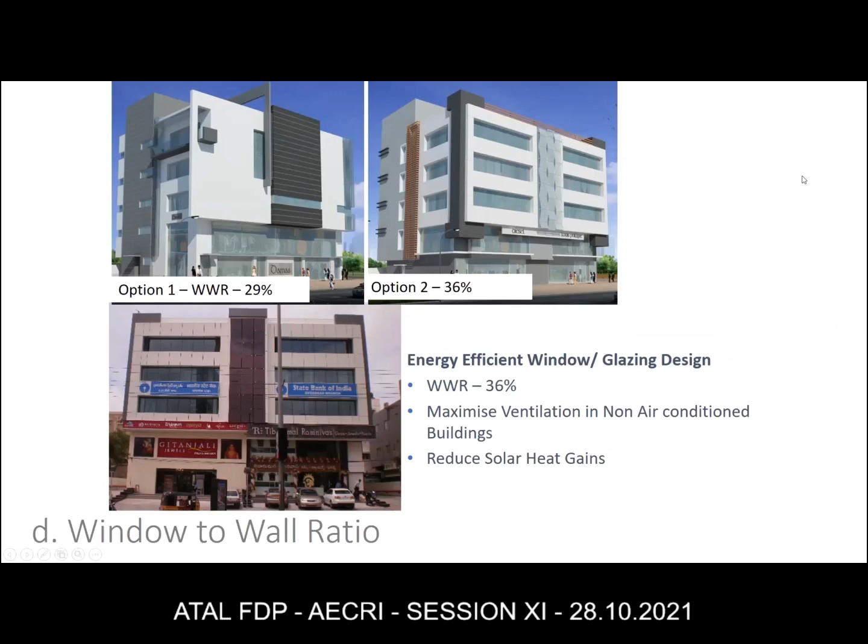There's another scenario where the first design came up by the architect. This is Coal India office, where they had more than 50% glass, and this was an iconic building in Calcutta, again warm and humid climate zone. They wanted a platinum green building rating. So what we had to do is tell the architect, you just can't tell an architect to bring down the window to wall ratio or change the design.

So we go up with calculations, analysis. The image above you see is the first simulation model, and what was the percentage savings we were able to achieve, and how platinum would be very difficult if we went with that kind of a design.

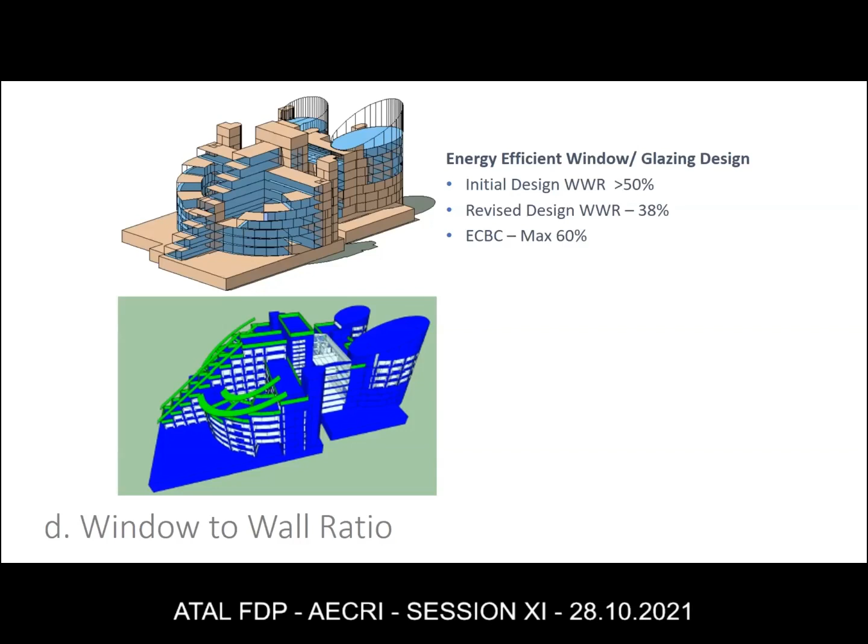Then finally the architect revised, brought in elements of ACP panels. So we were able to reduce the window to wall ratio from more than 50% to 38%. For your information, the latest version of the Energy Conservation Building Code gives us a maximum 60% window to wall ratio. More than that, there is a penalty in the design.

As I mentioned, there are shading devices that also need to be planned or designed, not only looking at your glass properties, but how do you plan shading devices? There are various ways you can do it.

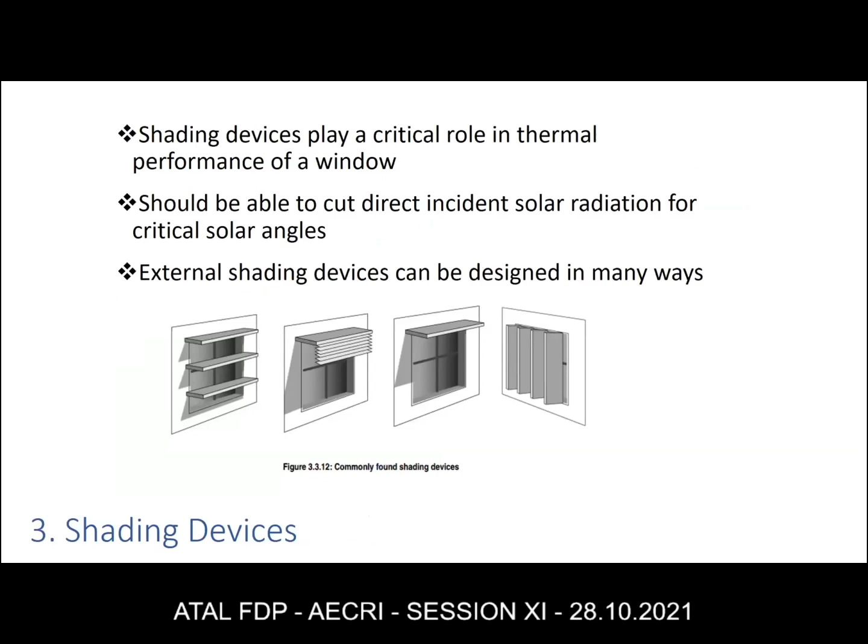For example, you can have one horizontal shading device after calculating how much direct heat radiation can be cut out, or you can break it up into smaller elements throughout the glass, which is what we've done in this Shilpa Architects office building. If you see, the shading elements are narrower. How the architect wants to design it in terms of aesthetics is their own concern, but it's important that you do a scientific analysis to understand how much heat you can cut out.

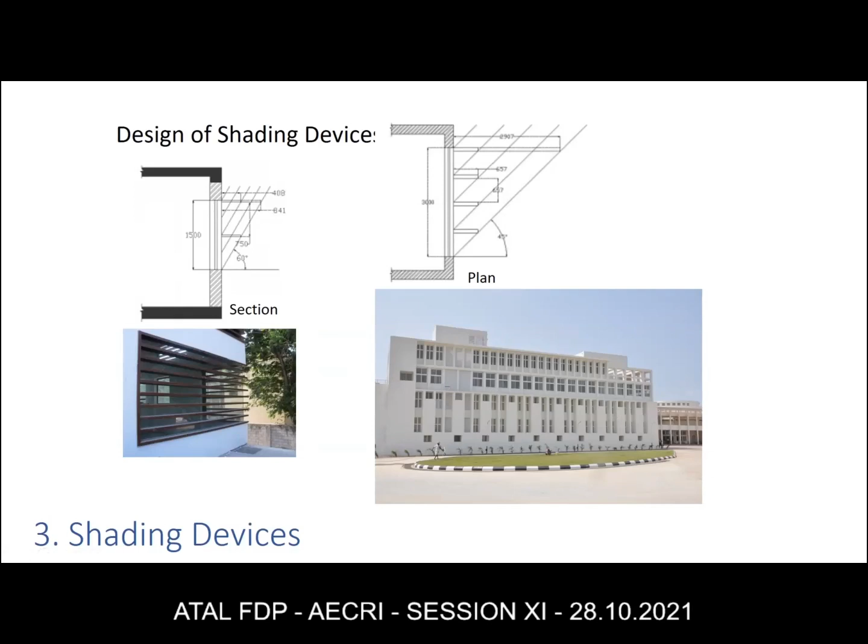Again, this is Symbiosis administrative block. If you see, they've done a combination of inset windows and fins. So how the architect or designer wants to do it is up to them, but how you integrate it is important. These are some international examples.

This building on the top left that you see is in Paris. In Paris they have different climatic conditions. They want to keep the heat inside in extreme winter to keep the building warm, and in summer they want the heat and daylight from outside to come in. So they have a third skin of the building. If you see the black horizontal portions, they're not fixed panels—they're actually operable, perforated louvers which open and shut depending on the climatic condition outside.

Again, on the right you see these extra glass louvers. This is a building in Berlin which has the third skin again, where these louvers are automated to detect temperature outside and automatically open up. This building below, which has a lot of landscape, is also a research building in Berlin.

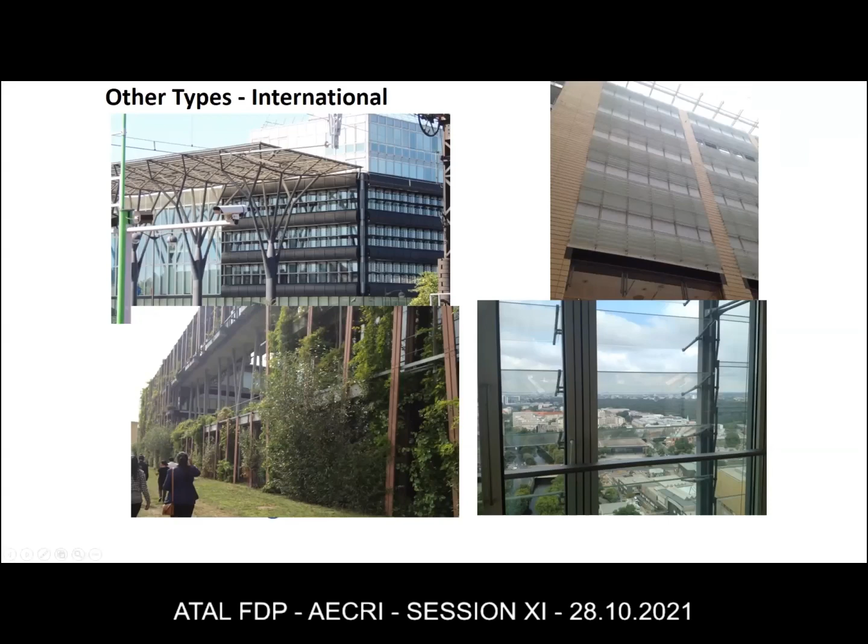In India also, we have various forms of shading devices that can be integrated. We have fixed, perforated screens. Of course, we have a long way to go in terms of automated screens and things like that, but we have fixed perforated screens or shading elements like this which can be planned.

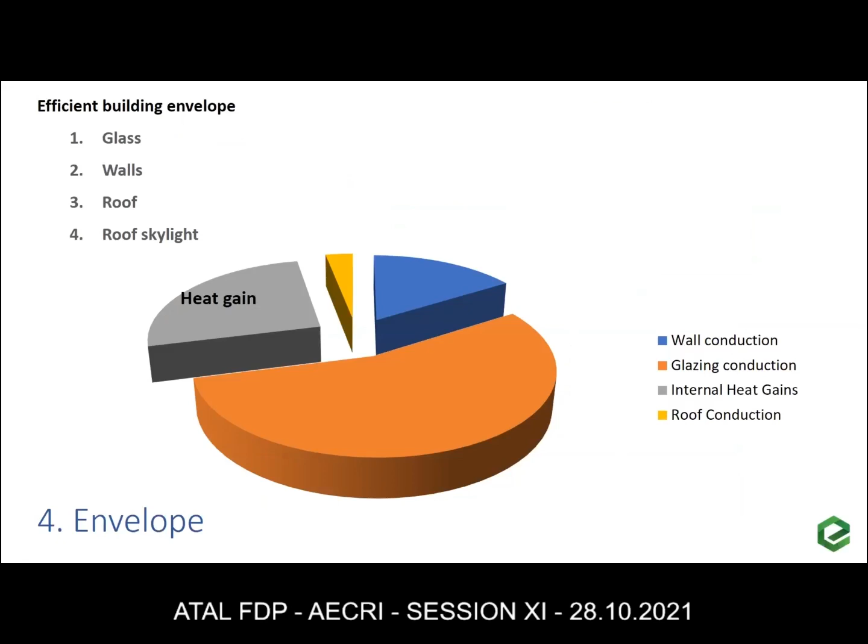Like I said, in a building envelope the maximum heat gain comes in from glass. This orange portion that you see—more than 50% comes in from glass. Then, based on whether you're a high-rise or a flat structure, your walls and roof also play an important part. So it's important we focus on the glass.

These are some of our projects, how we do it again in terms of materials. You can have a rat trap bond, fly ash bricks. In one project we used clay tile stuffed with coir as insulation. So however you want to plan, it's important that we know the thermal properties and how we can minimize heat gain into the building.

Most importantly, glass will be our first point of concern, then we look at walls and roof. I'll just quickly run through some case studies.

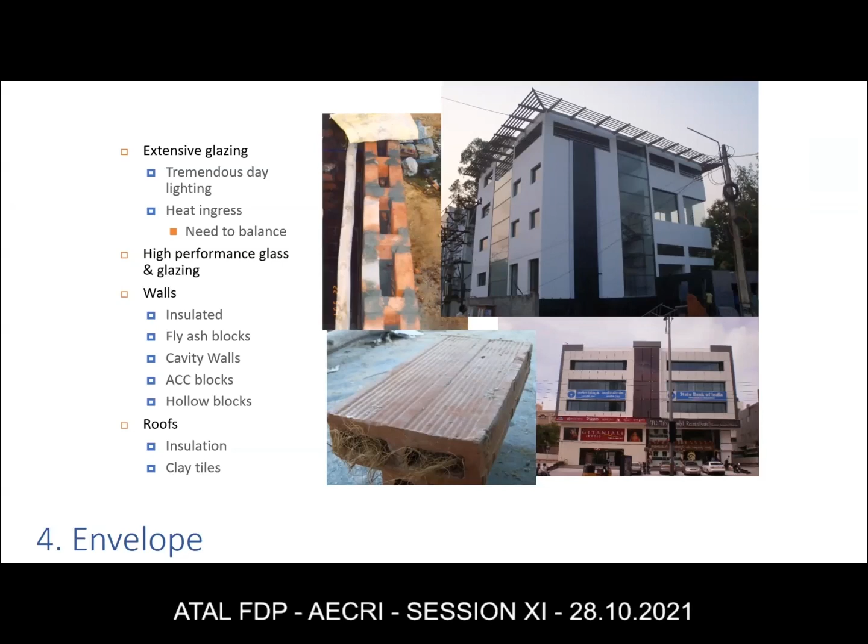Like I mentioned, this is the orphanage—a 20,000 square feet building in Hyderabad. All of us know Hyderabad as a composite climate zone. We did the design and the green building rating part also for this project.

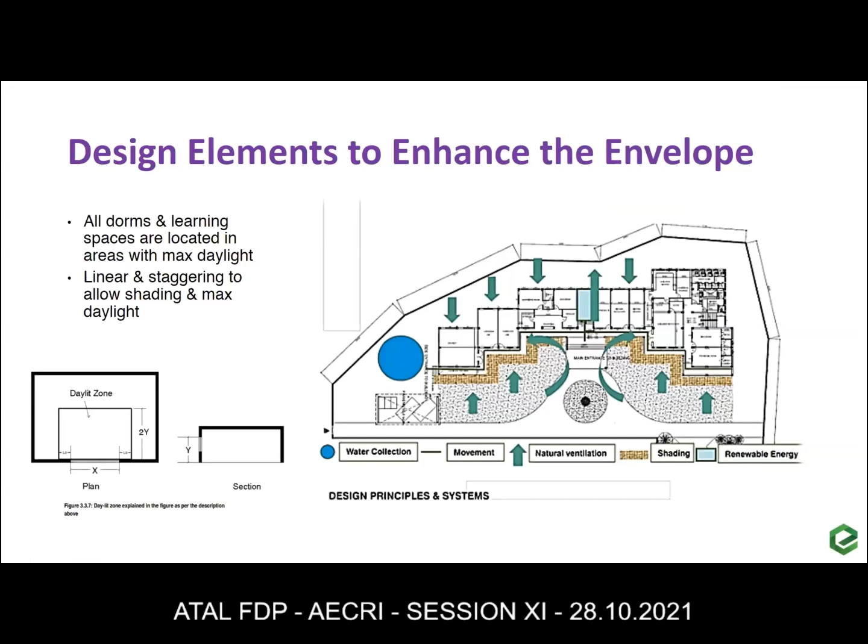If you look at it, the dorms were key spaces where children spent most of their time, so it was important that the dorms were sufficiently shaded and had access to adequate daylight and views. It was also important to capture the wind draft because corridor spaces were important, and children spent a lot of time in the corridor, so we ensured those spaces could capture the wind draft. The glazing elements were adequately shaded facing north and south, and the east and west were buffered with toilets and other services.

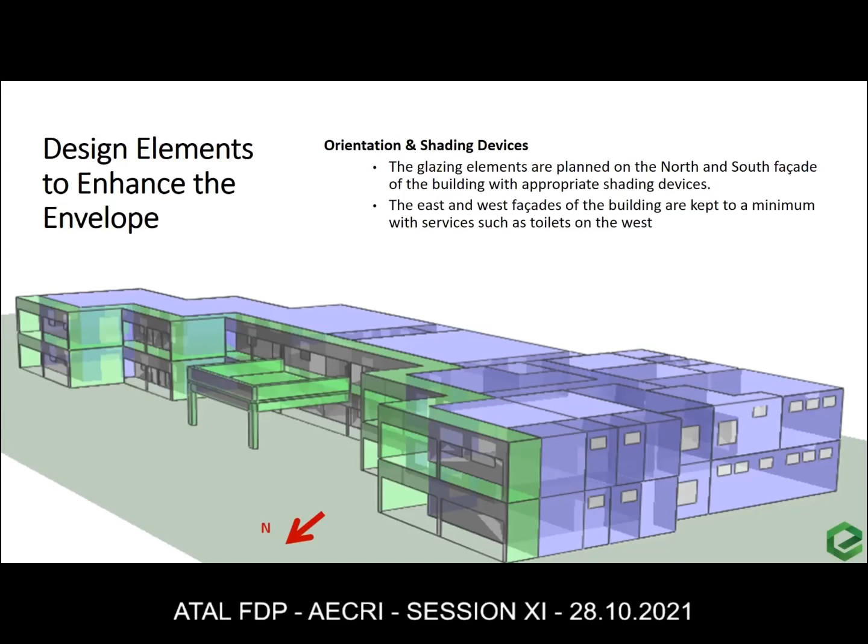So what we were able to achieve—if you actually look, we had a bit of solar also—we achieved 20% savings without solar, and about 76% of the spaces had access to daylight, with 100% having access to views.

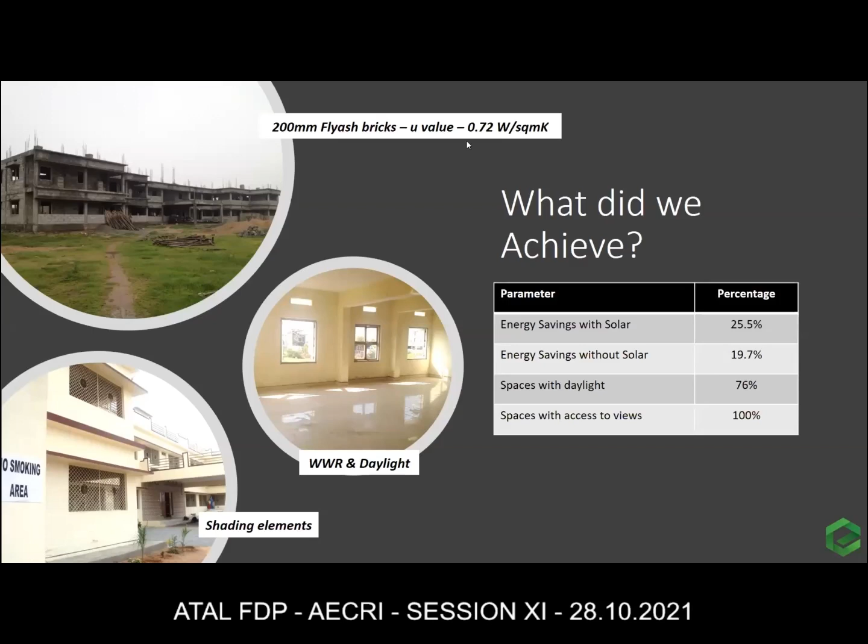This is a school in Chennai, Maraimalai Nagar, Ela Green School, which we did everything for. The built-up area is about 86,000 square feet. It's a mixed mode building, air conditioned and naturally ventilated in parts. Here we did the architecture, green rating, and everything—it's a LEED platinum certified building.

So we had to see if we could bring in vertical shafts right to the roof, have turbo fans on top to create negative pressure, so that we are able to increase the air changes in the classroom when it's naturally ventilated. Because we know in a classroom when a child sneezes, if we have enough air changes, that infection is not going to linger in a classroom. Mind you, this building was designed much before the COVID pandemic.

It was in 2017 that we designed this, and it just seems that right now it is the most suitable given the current scenario. A good design would be having 4 air changes per hour. When I say 4, that means the quantum of air that gets completely replaced in 1 hour will be 4 times. But we have been able to achieve around 10 air changes per hour, which means the chances that a child is exposed to infection is minimal. So yeah, this is one aspect of the design.

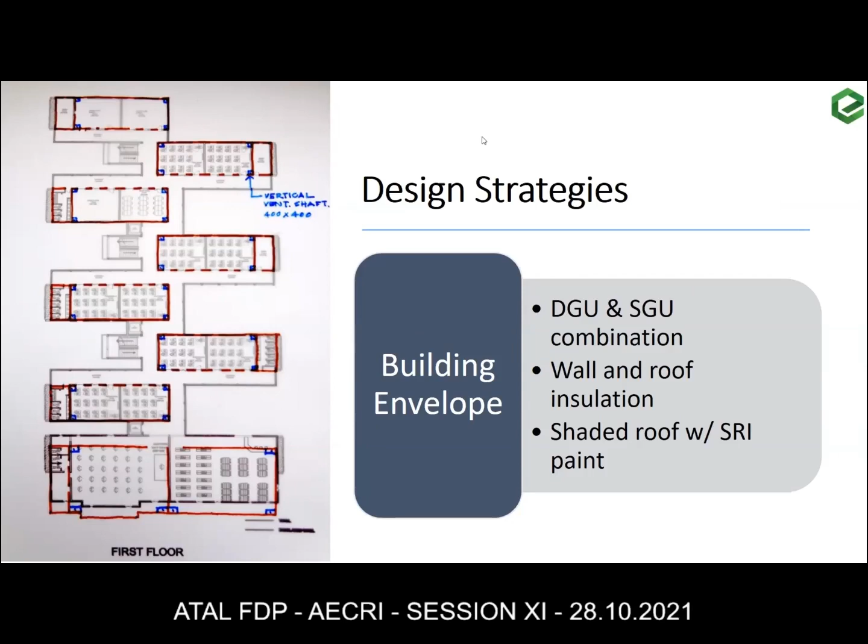And if you're looking at energy, we looked at how we can bring in double glazed units. There is double glass for performance only on those facades that are exposed to sunlight. How we ran the energy analysis, how did we decide the shape? If you look, there are pockets of spaces in the building plan. Again, this is basically for sunpath analysis, so that there are shaded pockets at any given time during the day. So if you look, this is the final design that happened.

And all the classrooms are modular, again, the precast system. So at any given point in a day, you will have access to some shaded play area. Because smaller children, today we realize that temperatures are extremely high and we still want them to play outside. So this is to make it more convenient for the younger age group.

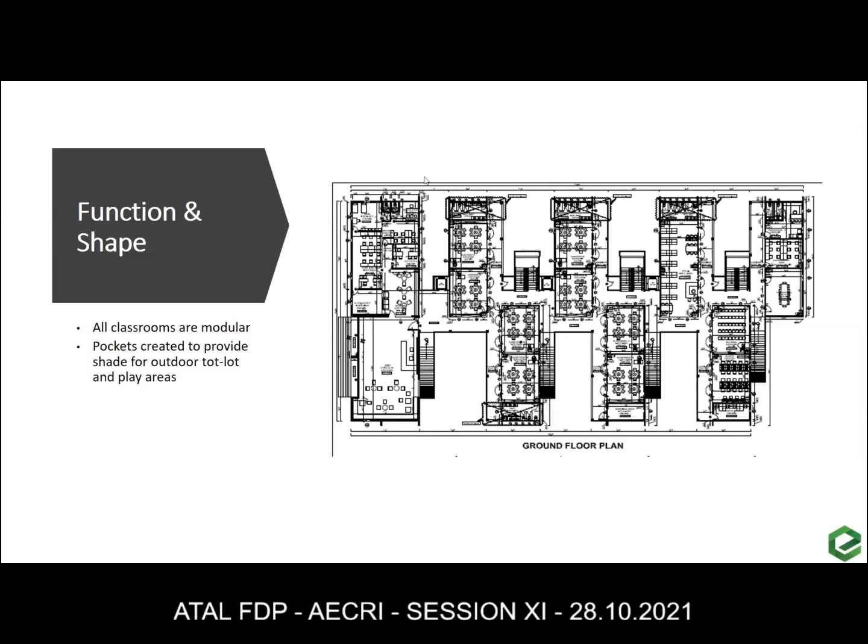So looking at the orientation, if you see this, this is the site, and we've designed the building such that there is no direct radiation on the facade of the building. So there are corridors or there are pockets, self-shading of the building. Only 1 or 2 facades will have direct radiation. If you look at the window to wall ratio, we were 31% of glass on the facade.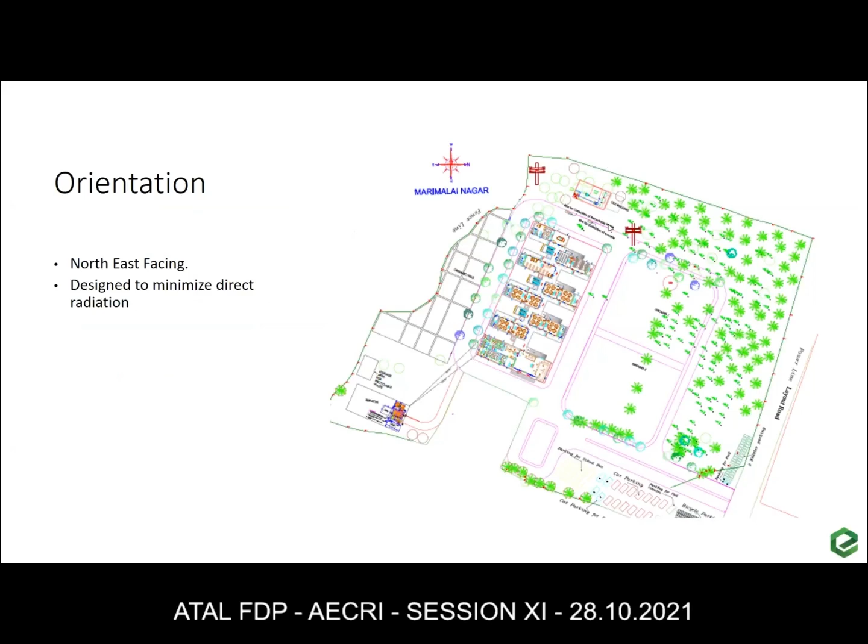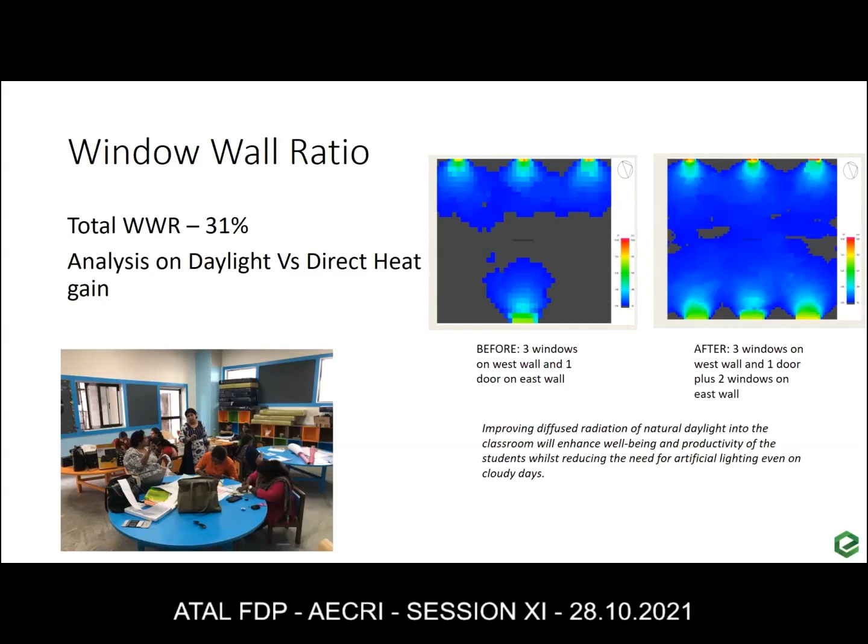So this is how design analysis helps us. If we don't do this, you would have ended up creating solid doors, then you will sit in the classroom, realize you don't have daylight, then turn on artificial light. So all this, to avoid all this, is where we do our scientific analysis.

For materials, we've done insulated panels. If you see, the green is expanded polystyrene foam. I think we've done 50 mm on the roof and 40 mm insulation in the walls.

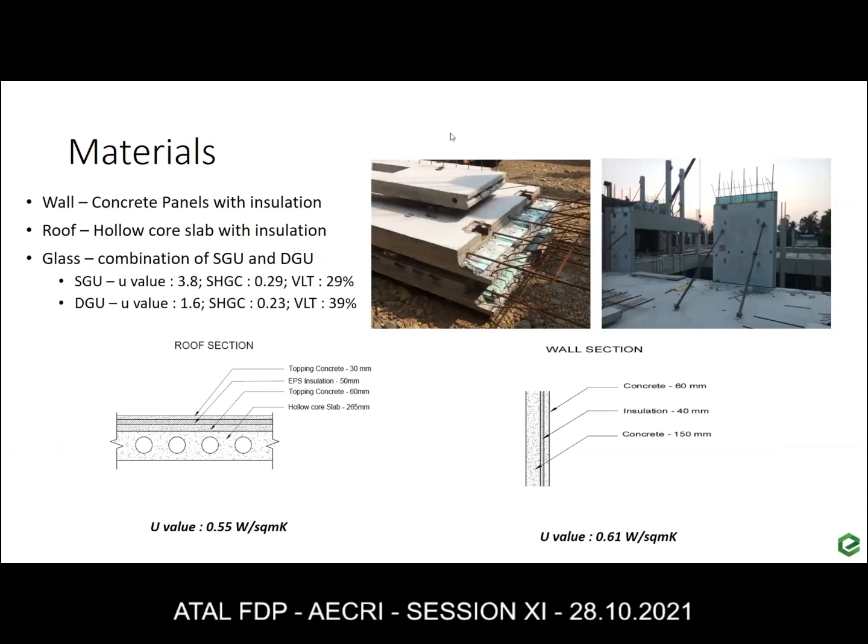What is it that we were able to achieve? We've done the passive system, the shafts, we have green walls, we added insulated panels, we've had a combination of both double glazed units and single glass. We were able to achieve a 9-degree differential between the outside and the inside. This is a lot. And this is without air conditioning systems.

The third is your Coal India corporate office building, and again I show you. If you see the shading elements here, there are windows and a reflective glass layer also. This was again the architect's beautiful idea of not having to use blinds inside the open office, because already the floor plate is so designed to make sure there's daylight from both sides. But along with daylight, there'll be glare also. Then what is the purpose of having windows?

The best example would be if any of you have come to Chennai and have seen the Zoho building on that GST road.

It's a circular building with glass, but past that it's completely fitted with blinds. So what's the purpose of having glass then? These are small design aspects we consider at the design stage. Reflective glass was used as a shading element, and you can see that in the facade itself. It's a 250,000 square feet building, and as I mentioned earlier, there's depth of floor plate and stepped floors.

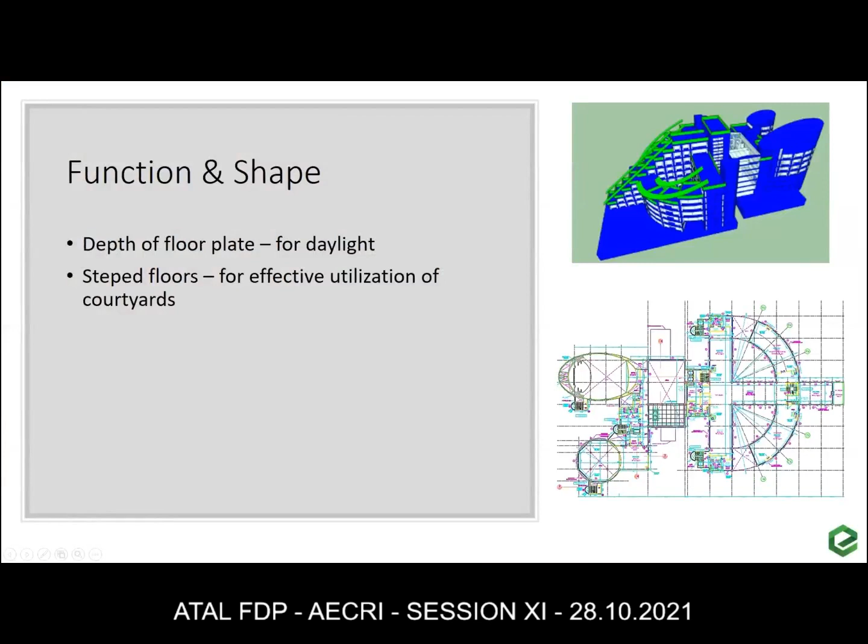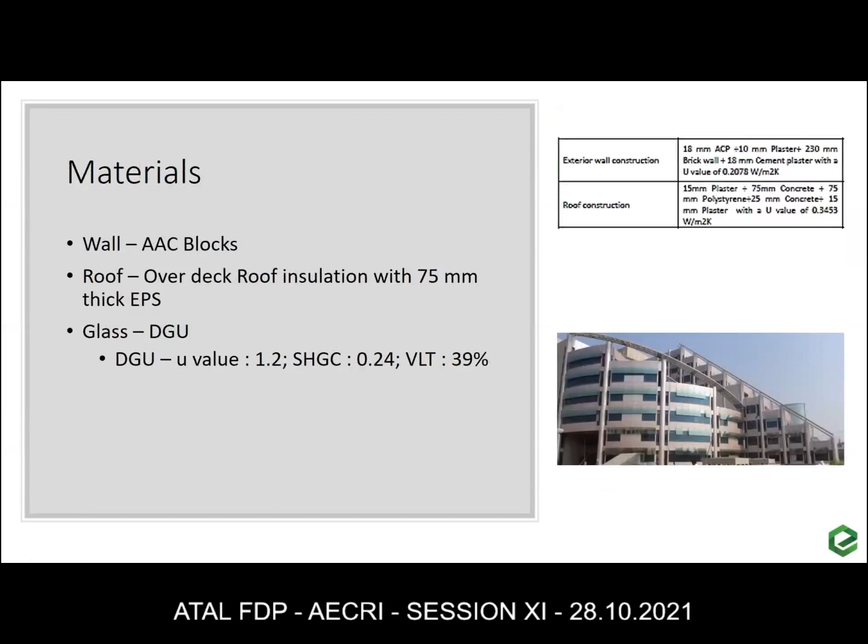Here they used high performance glass. We used aerated aerocon bricks and overdeck roof insulation for building materials. They also used water cooled chillers, since that has more efficiency in air conditioning systems than air cooled chillers.

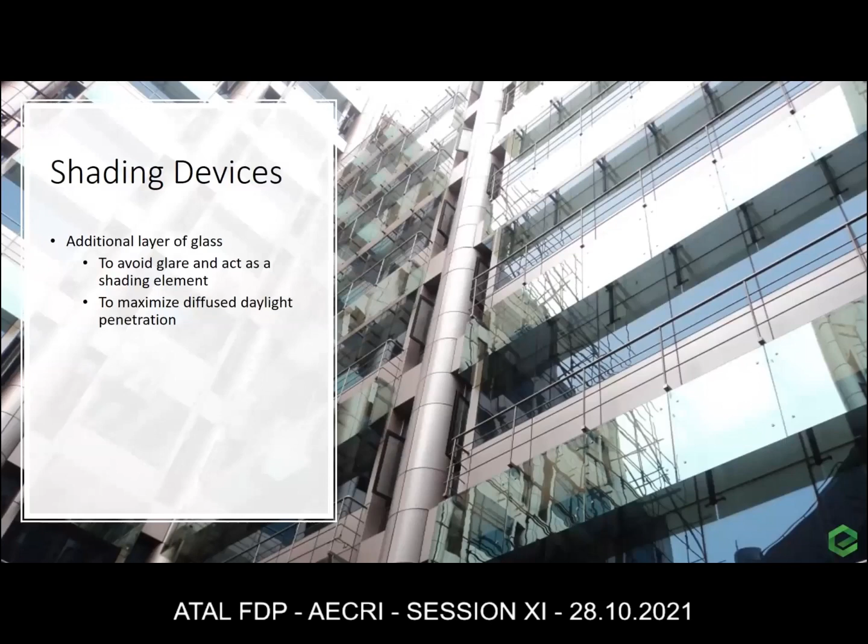So what we were able to achieve is about 60% savings with solar. The system had about 140 kilowatt panels integrated into the building design itself. We had 42% savings without solar, and about 78% with daylight spaces. Usually in a large building close to 3 lakh square feet, it's very difficult to achieve more than 75% daylight access, because you can't give glass all over. But they were able to achieve minimal glass, maximum daylight, and 100% access to views.

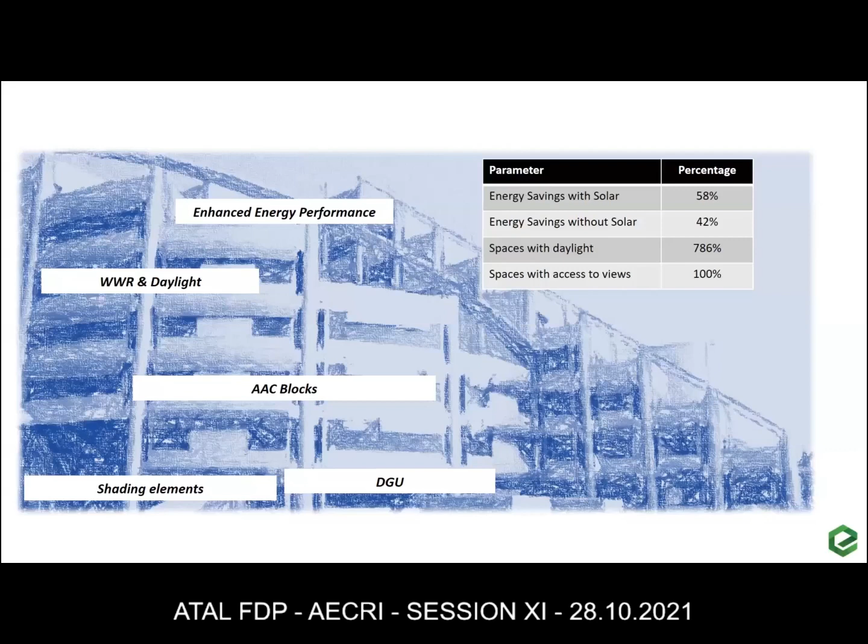I'll move on to one more case study to show you how the design process happens. This is a small project, 30,000 square feet in Chennai, where the architect was Katche and Associates. The client was very keen on having an analysis prior to design.

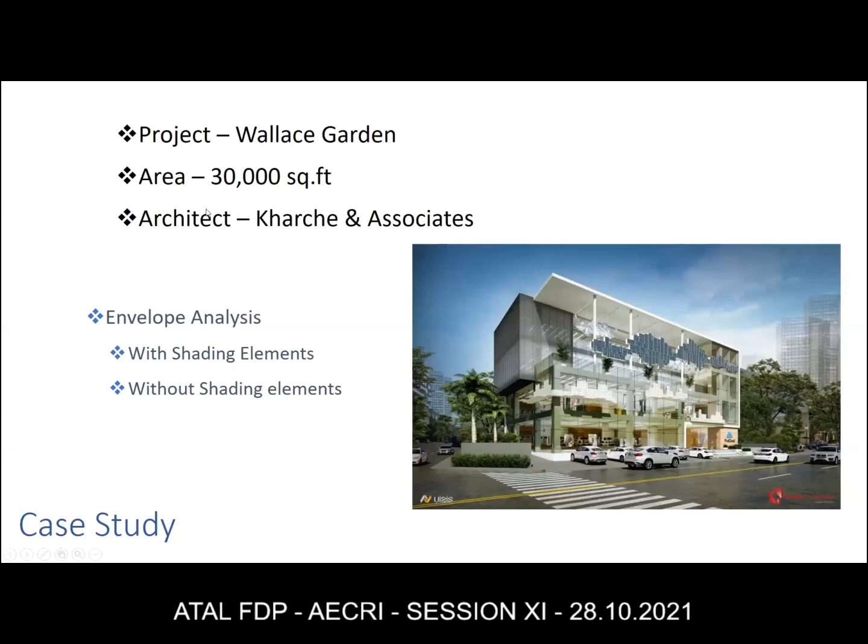We did an analysis—this is the image of how the building was given to us, a basic block model, and we were asked how we could come up with an analysis to achieve an optimal solution. Since it's a small, constrained site, we explored various options. We gave a solar canopy because anyway 25% of the roof area had to be set aside for solar as per CMDA norms.

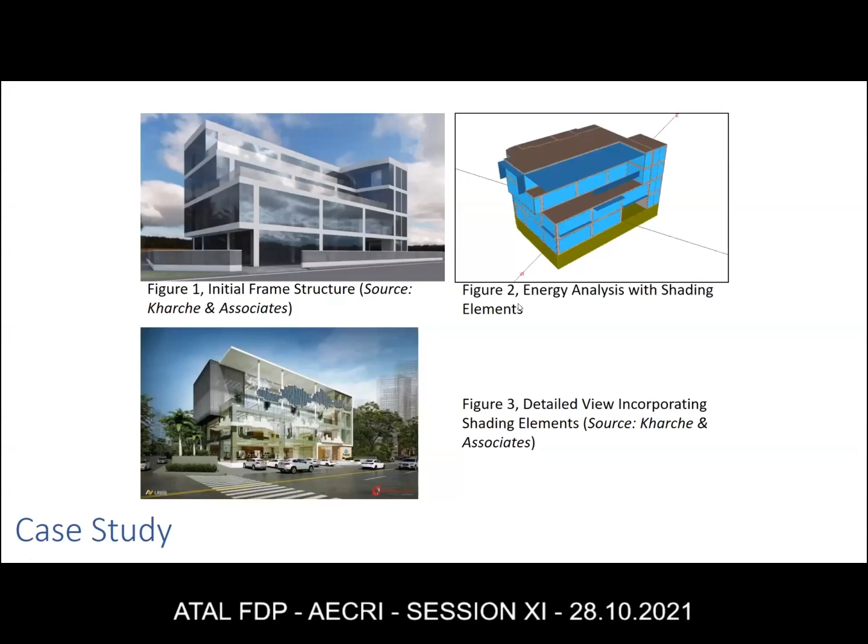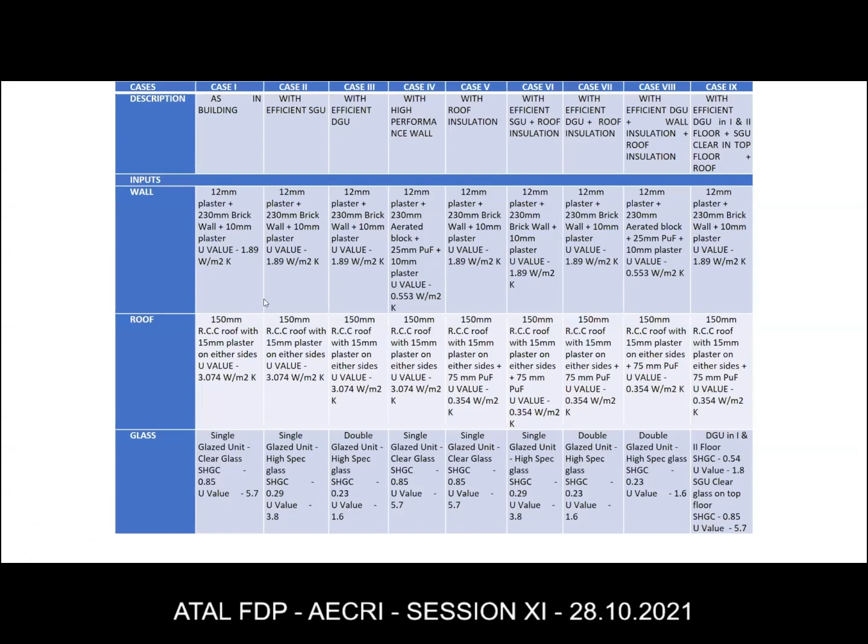We did 9 cases, starting with the as-is case and moving to a best case scenario, giving various options in terms of materials, glass, roof, and wall. Between case 1 and case 9, the worst case scenario consumes 954 megawatt hours per annum, and in a best case scenario with the solar canopy, it's much lower.

The best case scenario is case number 8, at 459 megawatt hours per annum, a 50% energy savings immediately. But there are restrictions—pricing, costing, and most importantly the client wanted the first few floors to be clear glass, since it's a retail space and there had to be visibility from outside. So we had some restrictions there.

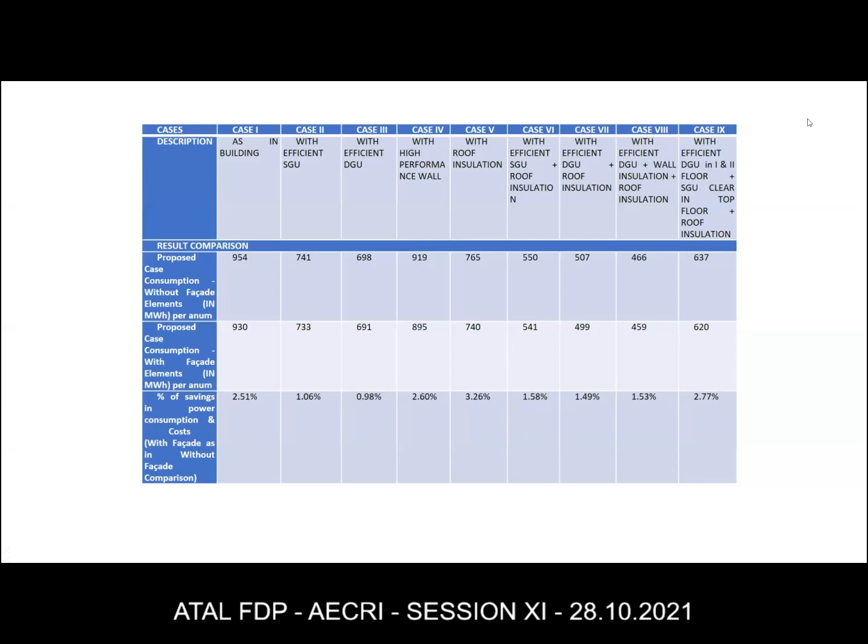We did a combination of glasses, high performance and clear glass. So the best possible optimal we were able to achieve is 620, which is still about a 35% reduction. This is how analysis helps us achieve a green, sustainable, energy efficient building.

So what I'd like to say is there's no single best way to do things. It depends on how we define our goals, the architect's inputs, and the client requirements—like if it's a retail space, you want it completely visible. The most important thing is how you follow the integrated design process, how you follow the right approach, and what we're able to achieve in that process.

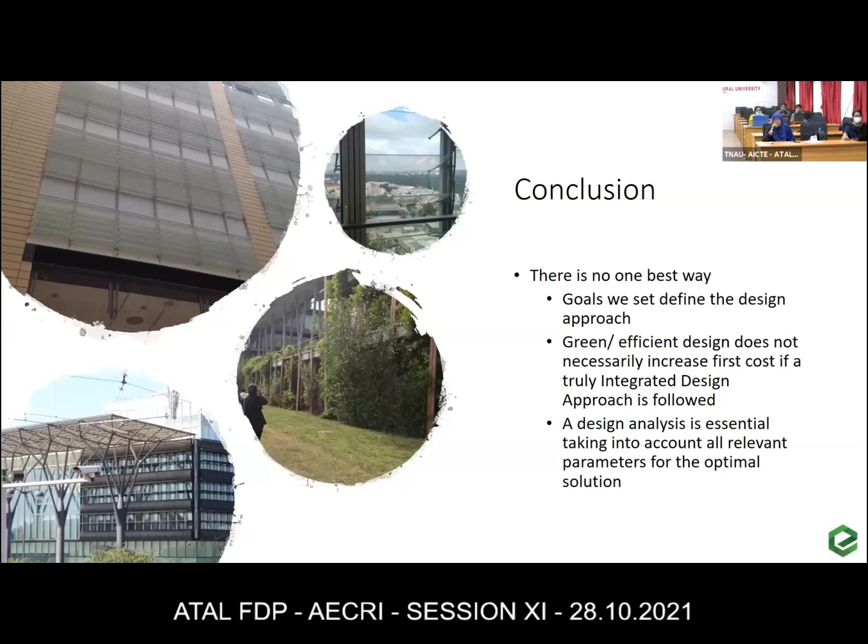Ma'am, we have a question on the chat box: is a green building the same as a smart building?

A smart building is where you integrate a lot of technology—metering, monitoring, BMS, all of that—and it is a part of green building. A smart building is definitely a part of green building where you have monitoring mechanisms in place, but they don't necessarily need to be synonymous.